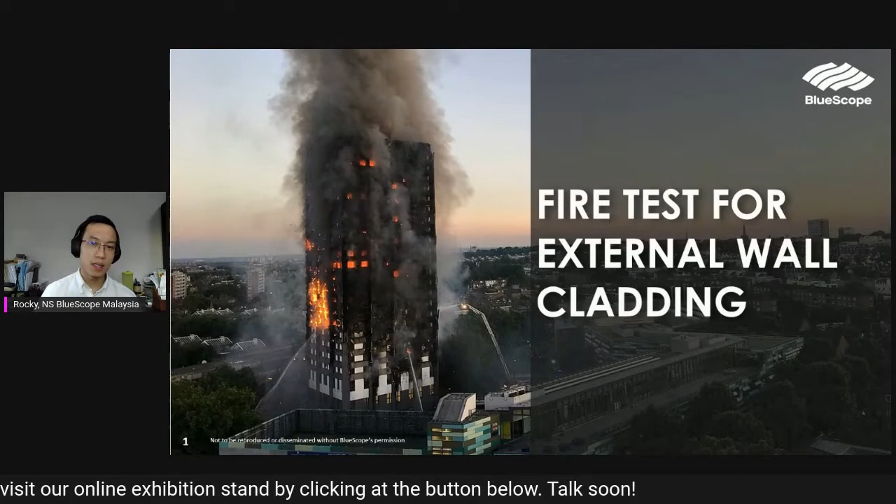So prior to introducing BS8414 and the requirements needed to pass the test, let me give you a bit of context on its importance, and also what measures were done in Malaysia prior to this test to curb cladding that could potentially catch fire.

So of course this is a hot topic, amid the incident that happened back in 2017 at Grenfell Tower. The picture you can see here is a really sad story where I think there were 72 fatalities after this incident, and it was actually caused by a simple fire.

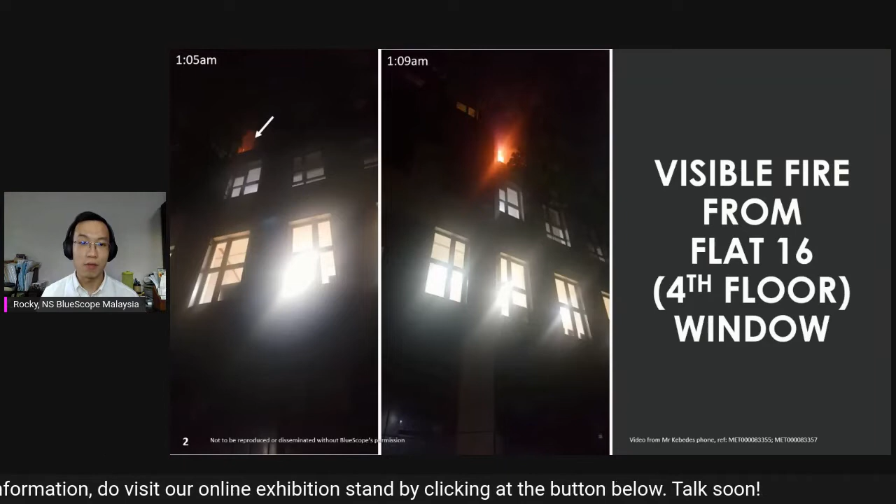So the context of this story is this: in the early morning, around 1 a.m., there was a fire that broke out from this building, in a unit on the fourth floor. The fire broke out of the window and started spreading outward, and it took only 20 minutes for the fire to spread from the fourth floor all the way up to the 24th floor.

And it didn't just spread upward, but it spread around the building. As you can see here, it actually completed one circle by the time it reached morning, and the fire was not extinguished by the time it reached early morning. You can also see that the fire broke into different units and caused fire spreading inward.

And of course, upon investigation, it was found that the cladding used to retrofit the building is conventionally called aluminum composite material, with an infill that is polymer, polyethylene. This infill itself is the major cause of the fire spreading.

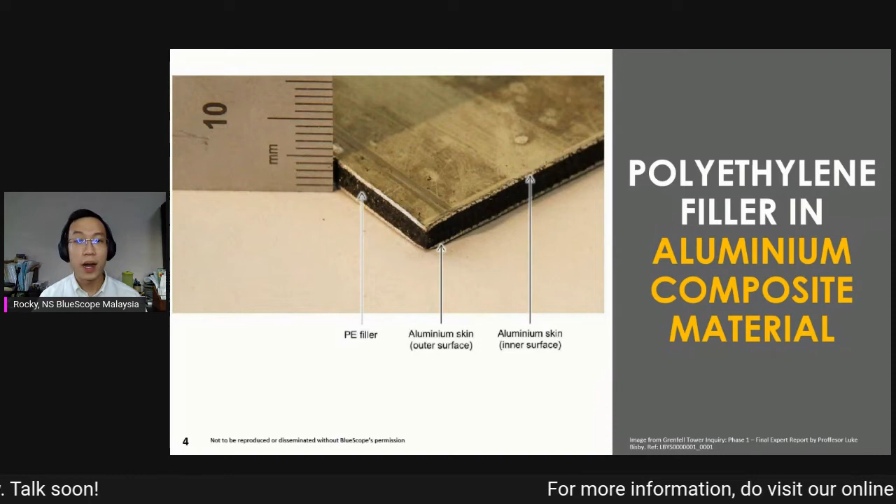So of course this is not unique to the Grenfell incident, it is also seen in various occasions throughout the world. In Malaysia, prior to the Grenfell Tower incident, I found one back in 2016 where the fire actually spread due to ongoing maintenance work that was done. The maintenance work involved some heat, some fire perhaps, and all of a sudden the cladding caught fire.

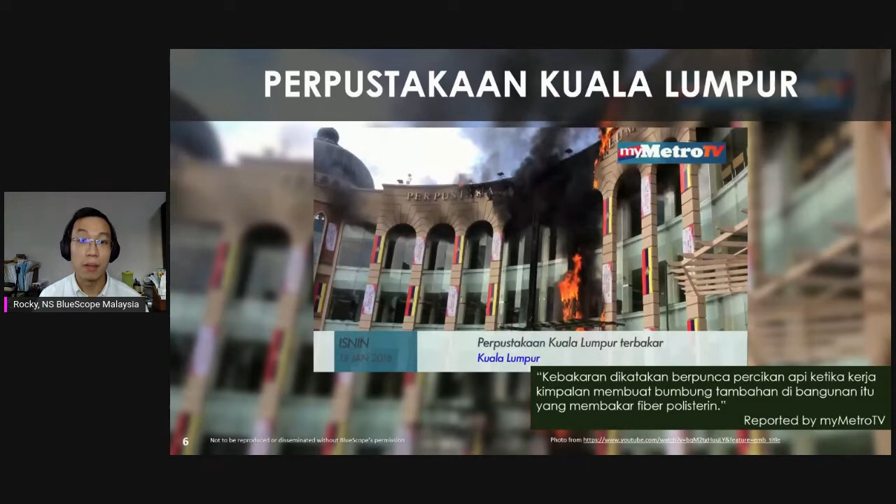What you can see here is that the fire quickly spread across as well. It's very similar to the Grenfell issue, and it was identified that there was a certain type of polystyrene used in the cladding, which created hazards. But luckily for this incident, there was no fatality.

And of course the more recent one was the KWSP PJ incident, where again there was maintenance work going on the external building, and the fire caught on and spread across very quickly. This is very similar to the example shown earlier. Upon investigation, it was found that the cladding itself did not meet certain safety requirements, and that particular reason seems to also be that there is a certain polymer, or what they call polyfoam, used in the cladding.

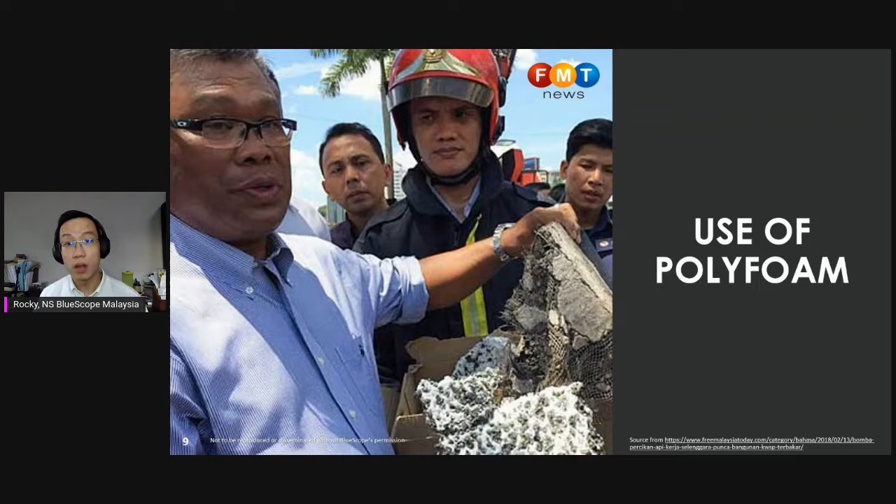So the question is, with the existing or previously existing system or regulation, why did this incident still happen, especially in Malaysia? Let me put you in context. Prior to this BS8414 test being introduced to test external cladding, to check whether it is suitable to be used and does not pose any fire incident or safety risk, they used this thing called Class O.

As you can see from this red box, Class O is less understood by a lot of people, and the requirement for a material to be considered Class O is that it needs to be tested under British standard BS 476 Part 6 and Part 7. I'll briefly run you through it later. One of the other misconceptions is that people will always perceive Class O as non-combustible material.

A material that is classified as Class O need not be non-combustible. I'll give you a brief rundown of what is non-combustible material. The new standard is actually BS 8414, which I'll explain briefly - how the setup works and the requirements needed to pass, especially in Malaysia, since that's the regulation enforced here.

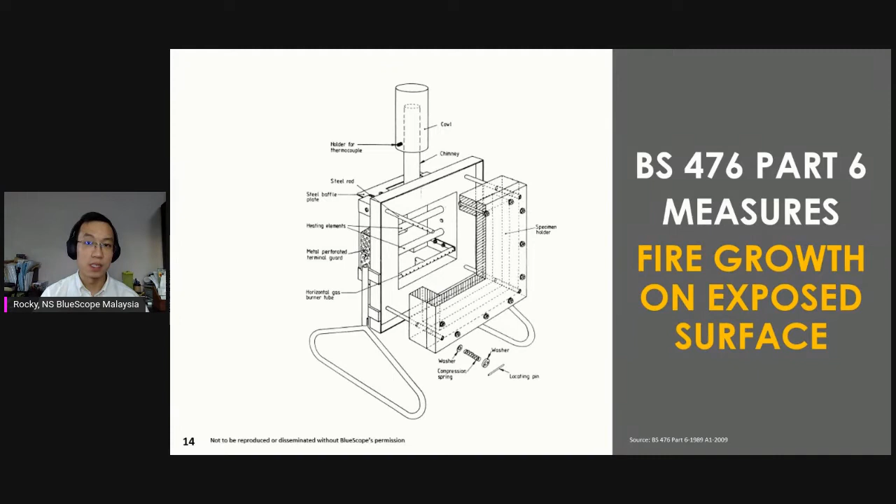So Part 6 goes like this - this is a diagram of the jig used to test the interaction of the building material with fire, testing whether fire would grow exponentially or upward from the surface. The specimen, also called the building material, is placed within this jig, and a fire source comes up front from the surface. Various abstract data is collected during this test.

Once collected, the data is calculated based on the standards. This test standard and calculation are quite abstract, so I won't go into details about how it's calculated or what it means. But essentially, you get two major results: one is the fire propagation index, or I, and another is indices I1, I2, and I3. These are used to check whether a material is classified as Class O or not.

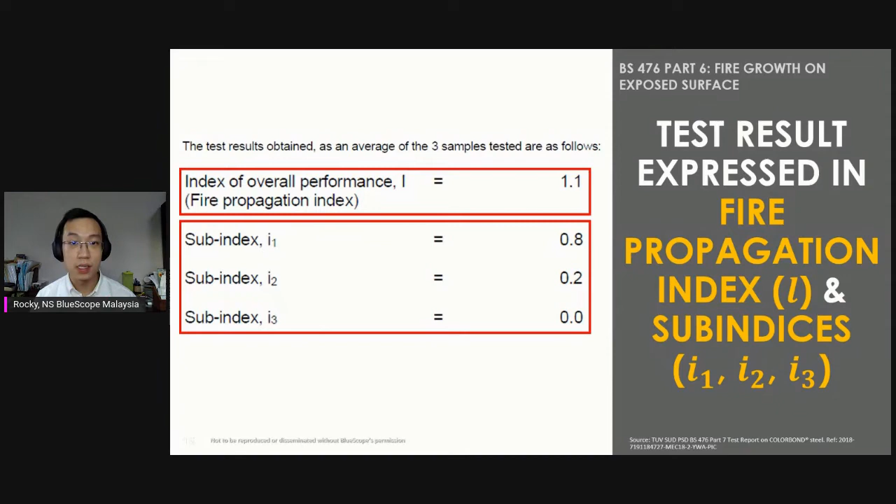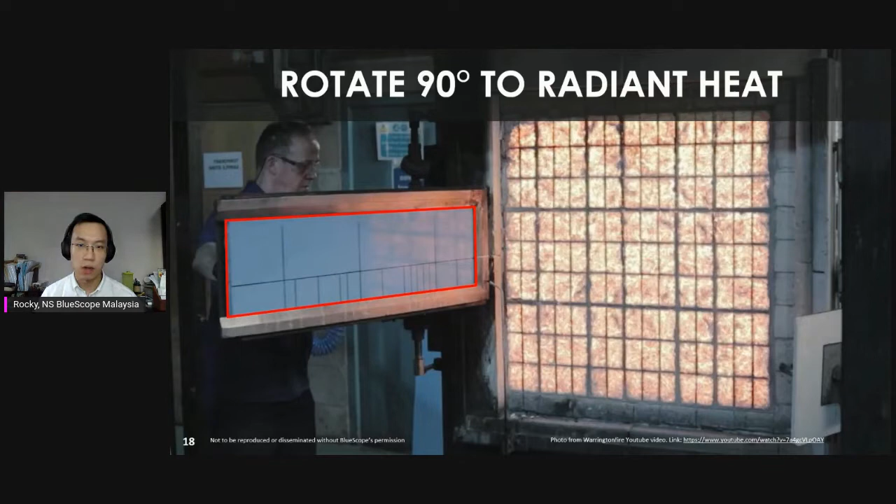The second test is BS 476 Part 7, which tests for spread of flame laterally on the surface. This is how the actual test setup works. I got an external source to demonstrate how it actually looks like during the tests - this is how it looks.

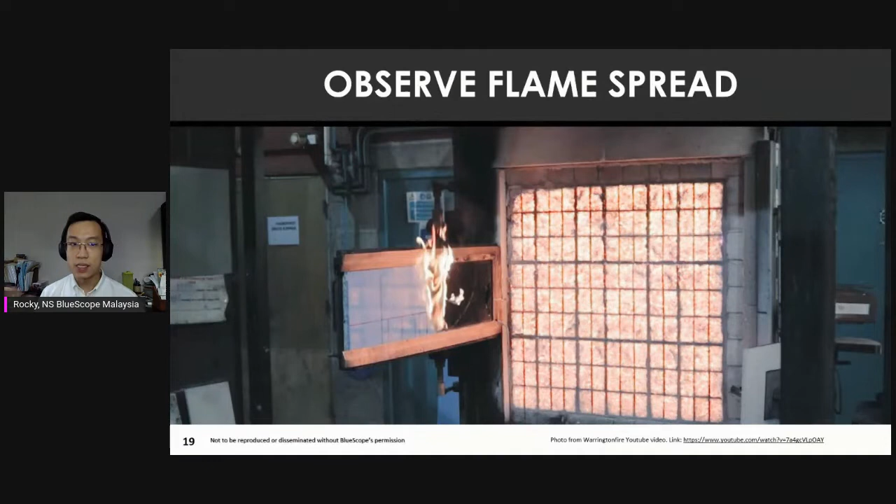The sample is installed perpendicular to the radiant heat, as you can see from the big surface, and there's an ignition point at the beginning. They test the whole thing until the fire subsides, or burns all the way to the end. As you can see from this video, the fire actually started spreading laterally.

In essence, this Part 7 test classifies the material as Class 1, Class 2, Class 3, or Class 4. If the fire ignited by the flame torch and radiant heat does not spread beyond the number 1 mark, then it's straightforward - it'll be classified as Class 1.

Similarly, if it does not spread beyond mark 2 but is within that range, it'll be classified as Class 2. Based on our observation - they actually test not just one sample but 6 sets of samples - if the result shows the fire does not spread beyond the number 1 circle box, then it will be classified as Class 1.

So the combination of Part 6, which is fire propagation index of less than 12 and sub-index I1 of less than 6, and Part 7, where the material is classified as Class 1, meaning it does not spread beyond box 1 - the combination of these two means the building material will be classified as Class O.

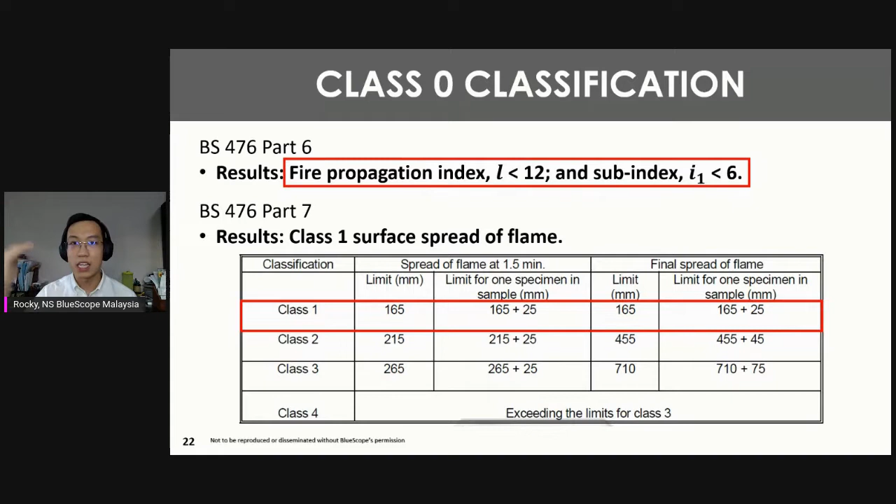In general, a pre-painted product with a very thin layer of paint would generally be classified as Class O. So we have done our test, and our product is considered Class O.

Having said that, Class O or these two tests have their own scope or limitation in terms of reaction towards a bigger fire. If you have a material where the infill itself is combustible, does not comply to these standards, or can catch fire, or even worse, like polyethylene that really adds fuel to the fire, these tests, part 6 and part 7, would not determine whether those will happen, because they only test the reaction of the building material surface. If you have a composite panel, they are only testing the surface, not the inside. This is where it differs from BS 8414, which I'll get into shortly.

Like I mentioned earlier, Class O does not represent non-combustible. Non-combustible goes through the BS 476 part 4 test. Non-combustible is actually a much more stringent requirement, because if it does not combust, it will not spread flame. But if it's classified as Class O, it might combust — the paint film might get burnt off very fast — but it might not spread flame, meaning it might not cause the fire to spread laterally or vertically. So that is what we mean by Class O and non-combustible.

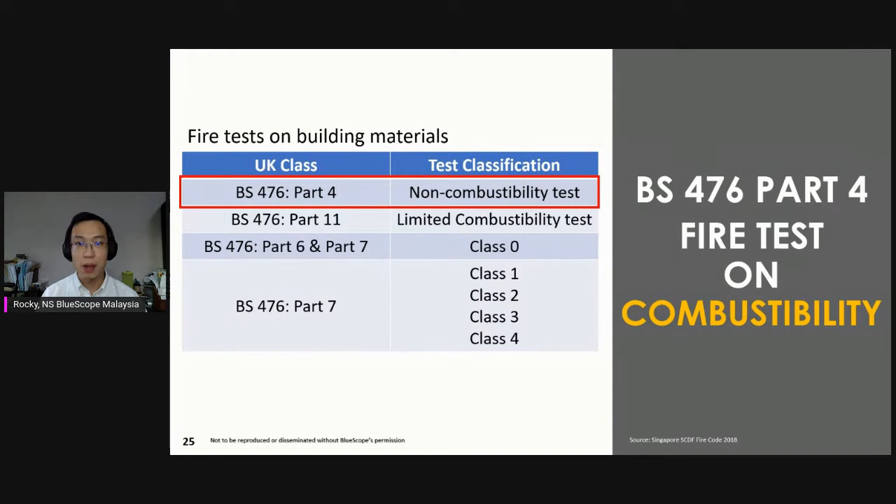So if you want to find out whether a homogeneous building material is considered non-combustible, you have to go through this test, BS 476 part 4. Here, they will actually test 3 specimens or samples of your building material, and come back with various requirements, which I will not drill down into. In the end, it will give you an answer on whether it's combustible or non-combustible.

We have done our test as well for those unpainted corrosion seal products, for example like Zincalume. Those will be classified as non-combustible material, without the paint film. And of course it's safer, because it does not catch on fire.

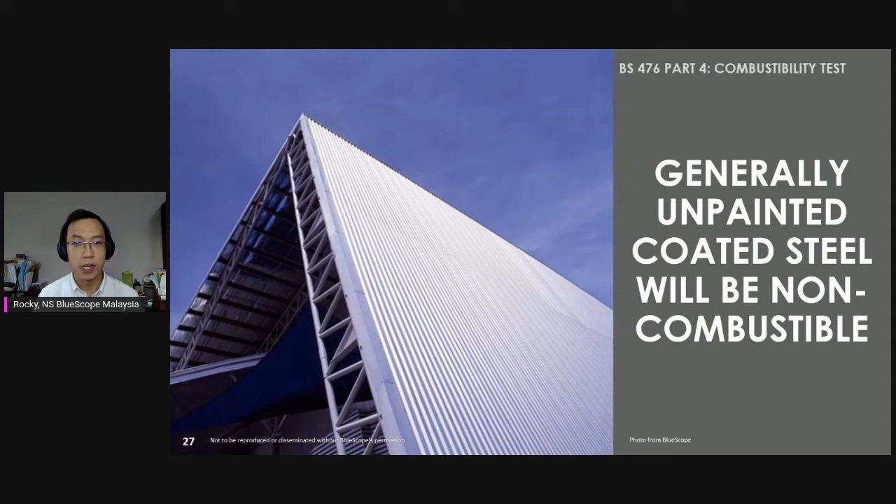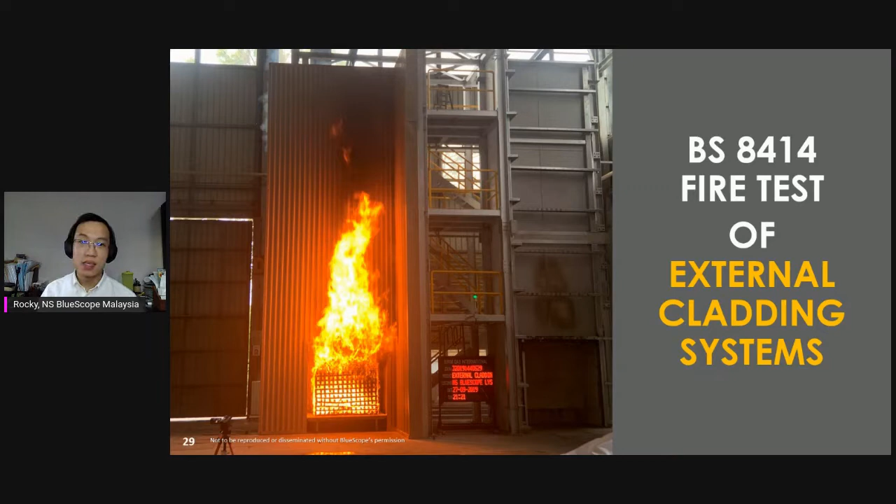Moving on to BS 8414 — what does it mean, and how does it differ from those tests I just mentioned? BS 8414 is actually a test for a complete external cladding system. This is how it looks like during the test. As you can see, there are actually 3 floors — the scale is much, much bigger, and the fire is much more severe than the earlier tests.

This test itself tests for a complete build-up. For example, there'll be a testing of the fire breaking out from this chamber, and then seeing how the cladding interacts with the fire. A lot of factors are taken into account, such as the cavity space between, say, a masonry wall and the external facade or cladding. The whole thing is to simulate how the cladding reacts to the fire, in plain and simple description.

So the intention is that if the whole cladding system is installed, they want to see whether a fire that started from inside the building — for example, like the Grenfell Tower, where fire started from the kitchen — as well as fire from an external source, for example the KWSP or the Perpustakaan KL case, would cause the external cladding to spread fire upward and around. Ideally you do not want that to happen, otherwise it will cause harm not just to that one localized place, but spread all over the building.

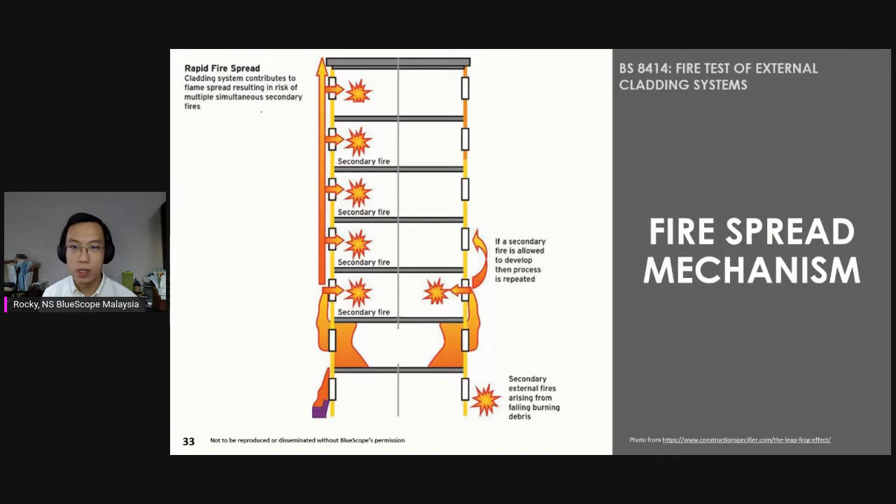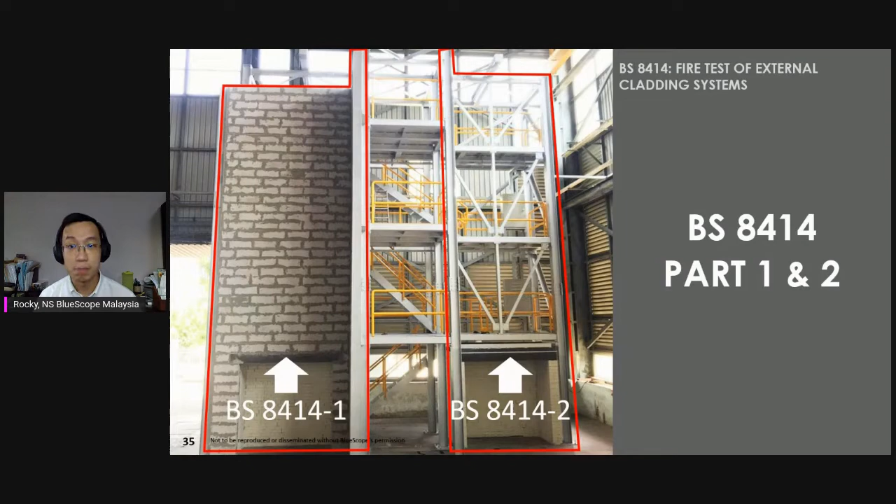Prior to installation, this is how the cladding looks like, and these are the test rigs. For BS 8414, there are actually two parts — part 1 and part 2. Part 1 is external cladding locking onto a masonry wall; if you have a plaster wall and want to beautify it by adding a facade or external cladding, you go for the part 1 test. If it's actually a steel structure wall, where the cladding locks onto this structural wall, then you go for part 2 test. In essence there's only one difference, which I'll go into later on, but the setup is more or less very similar. This is the diagram of how each looks like in terms of setup.

So there will be a main face and a wing face, where at the bottom you can see the combustion chamber where the fires will be started, and then there will be a fire source, a specific type of wood that gives an approximate amount of heat. The cladding itself needs to be at least 6 meters high above the chamber, and there are various other dimensions like the width and the wing face width.

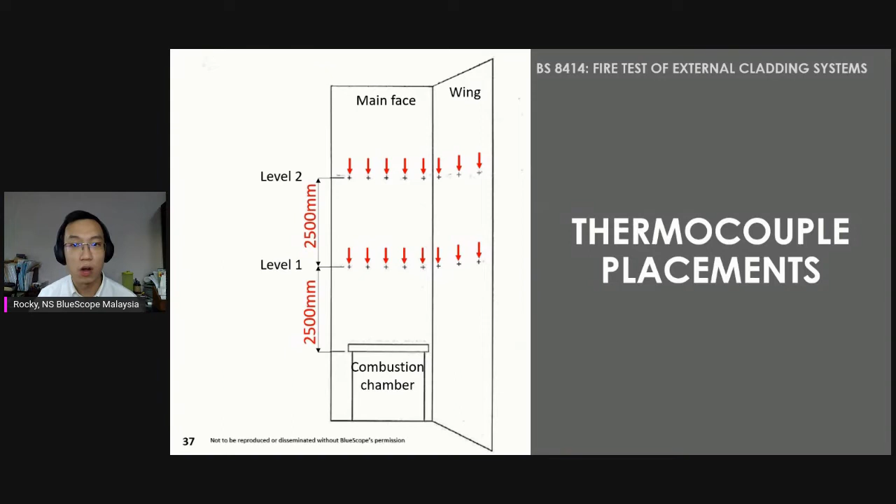There are actually quite a lot of sensors to be installed. So there are 8 thermocouples, actually more than that because there are external and internal ones. For level 1, which is 2.5 meters above the combustion chamber, there will be thermocouples, meaning temperature reading sensors. Then there is a more crucial one at level 2, which is 5 meters above the combustion chamber. So these two will be taken into consideration and evaluation for whether it passes or fails.

For the setup, for example, if it is locked onto a masonry wall, they will classify the outer surface behind it, in between the masonry wall and the most outer surface cladding, as internal area, and the outer surface will be classified as external. This is important because they will place thermocouples at those places, and within the internal area, if there are insulations thicker than a certain dimension, they will insert a thermocouple at the middle of that thickness. So there are a lot of sensors needed to take readings of how this cladding interacts with such severe fire breakout from the window.

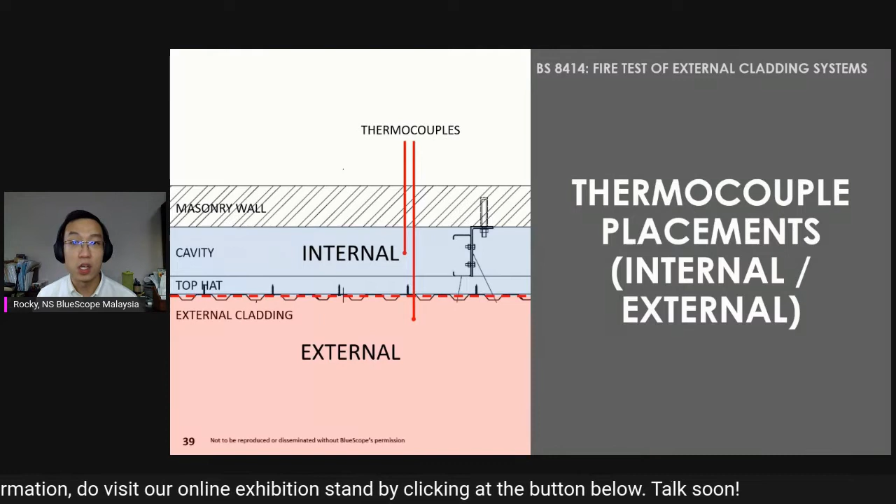So this is how the sensors look, the external thermocouple. It looks very simple, just a wire, but of course there are actually a lot of things connected to it to capture the reading.

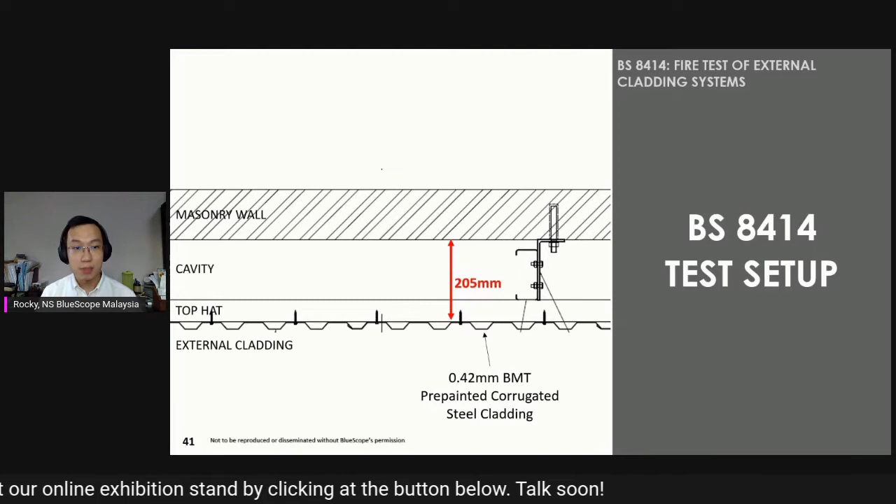There are a lot of factors that need to be taken into account. These are some examples, which Mr. Lau will elaborate on in more detail in the complete report. Things like the cavity space, or the so-called gap in between the masonry wall and the cladding, will be taken into account. These are some examples, or maybe the thickness of the cladding - those are also part of the consideration when they capture it in the report.

The amount of screws, the type of screws, the C channels, the thickness of all of that needs to be taken into account, because the requirements, also called the regulations, require that the specific type of setup, with a specific type of cavity space, needs to be tested to BS 8414 and acknowledged by BOMBA, who will give you an approval for that specific spec. After that, you can use the same setup for different kinds of locations or projects that require this test.

When it comes to requirements, it is similar to BS 476 class 0 - it will not be stated in BS 8414. If you read through the whole document, you will not find one section that tells you how to pass this test. That's because each country sets its own criteria, and since Malaysia adopted this testing standard from the UK, British standard, we also adopt the requirements from their regulators - building regulators or fire safety regulators.

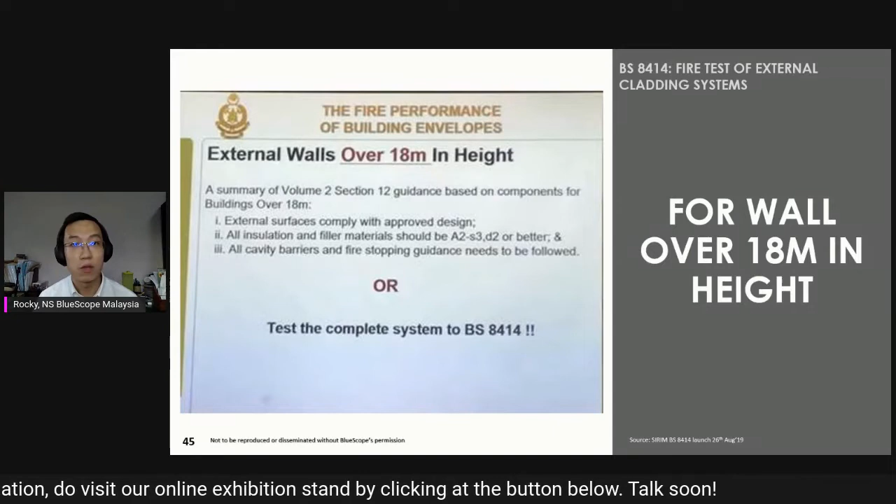Okay, so anything beyond 18 meters, then you can go for this BS 8414 test. Those are the exceptions. Right, so let's get into the requirements.

The first one is, remember the external thermocouple. Those external thermocouples will get readings from the fire source down there. If there's fire spreading on the external surface, then the temperature reading of this thermocouple will be high, right? So the requirement is this.

The external temperature should not exceed 600 degrees Celsius for 30 seconds continuously within the 15 minutes from start time. And I emphasize on start time because that is a very specific term referred to in BS 8414, the testing setup and terminology that they use. Start time refers to a specific time during the test, which Mr. Lau will elaborate further during his part of the presentation. So this is the first criteria.

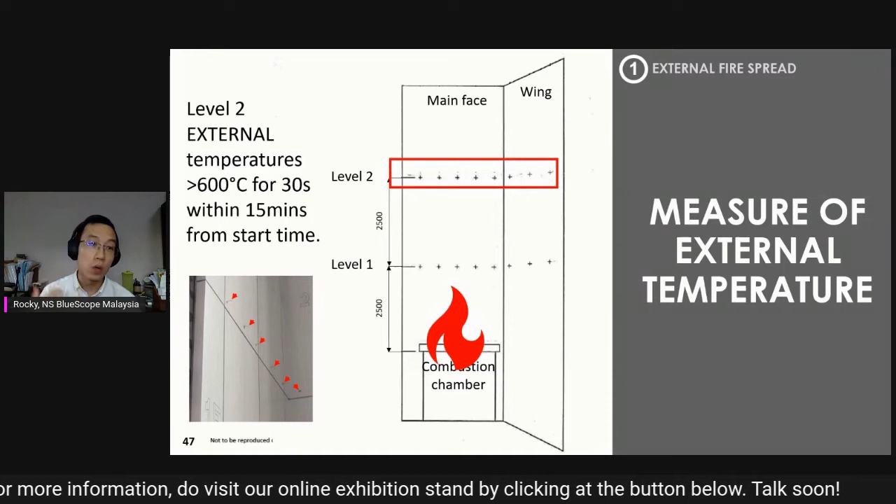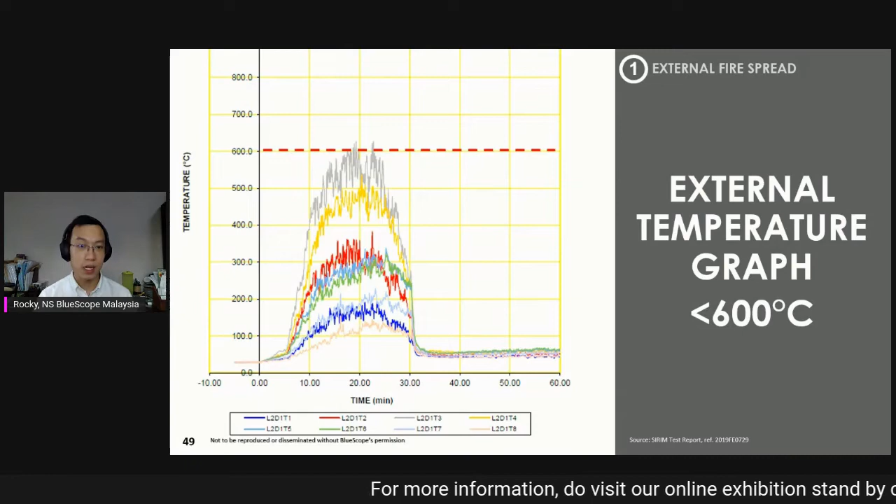Let me just extract, so this is how it looks like. If let's say this one, the fire actually briefly touched 600 degrees Celsius but briefly did not exceed 30 seconds, so this is considered borderline pass.

So another one, the second criteria, is internal fire spread. Same like external, the internal thermocouple also should not capture readings that exceed 600 degrees Celsius for 30 seconds continuously within that 15 minutes from start time.

Okay, and it is all measured, I mean the external and internal are all measured at the level 2 area. Level 1 is only used to determine start time. Level 2 is used to capture all this reading.

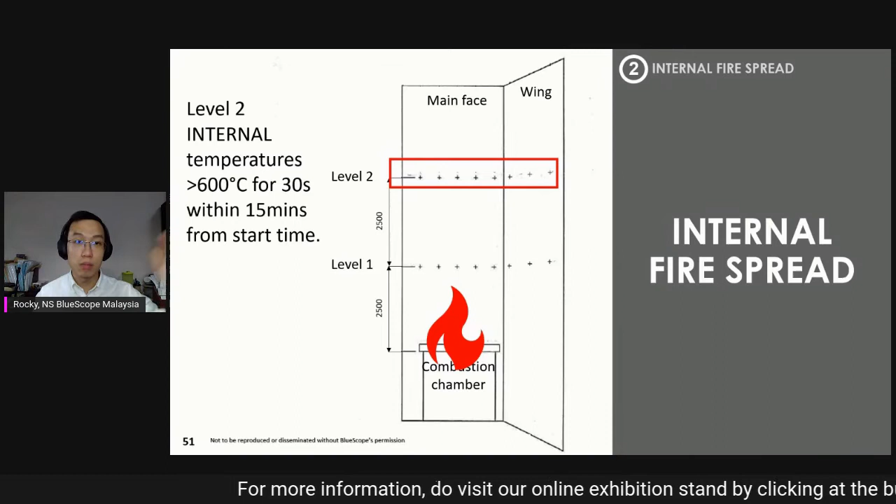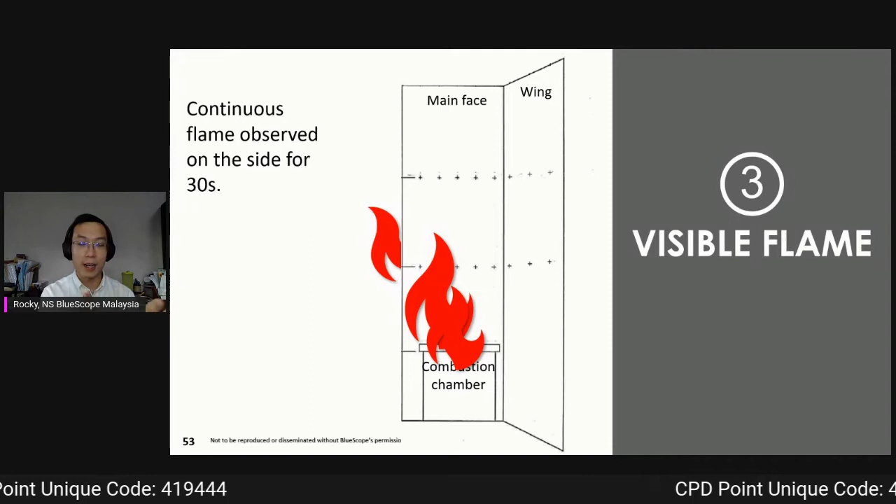So moving on to the third one, which is very qualitative, meaning based on observation. There should not be visible flame outside of this perimeter. Meaning, if the tester saw fire spreading outside of this main face from the back, or beyond the main face, top of the main face, for 30 seconds continuously, then you fail this third criteria.

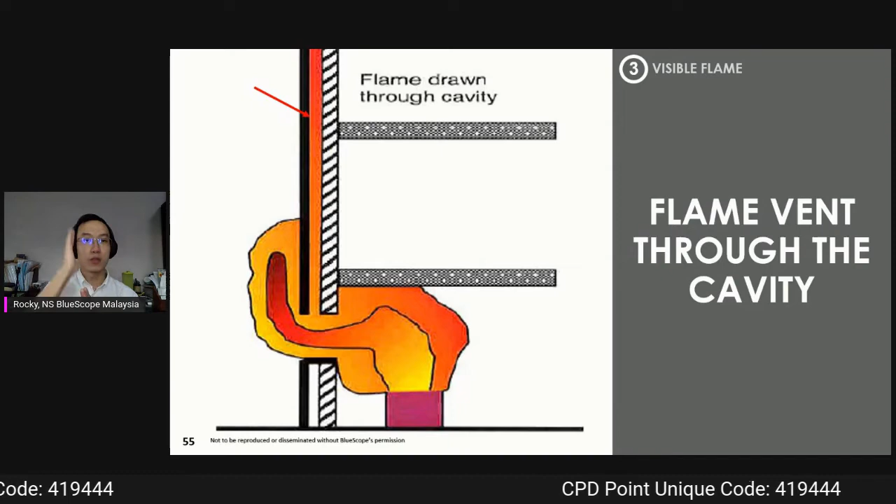So this is also part of the consideration why they need to determine the cavity distance, because if fire is allowed to vent through this place, then you will see visible fire. Of course, based on the test setup we saw and the testing done, there was no visible flame observed, be it on the side or beyond the perimeter.

Okay, so those are the first three. Of course, before I move into the fourth and fifth, we need to determine what we call the collapse zone, which are areas that are 2.4 meters in width and 1.2 meters in depth away from the window. So this is what we call collapse zone. Anything that falls beyond this collapse zone is considered fail.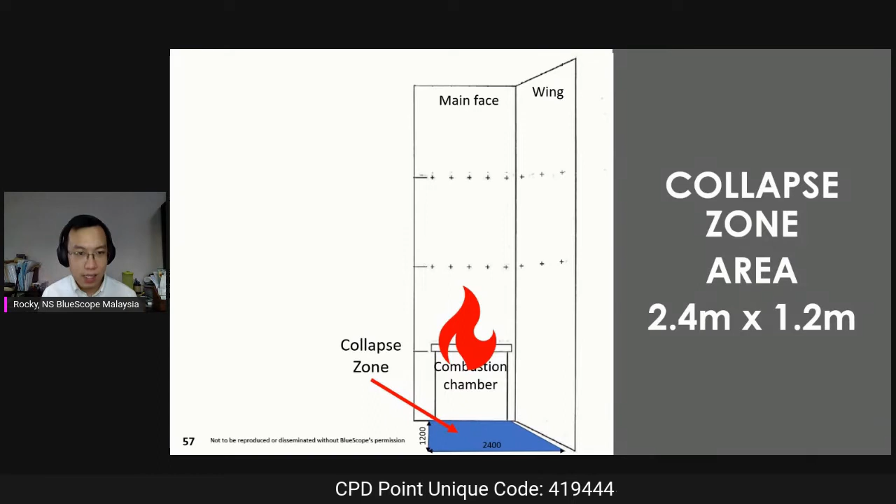So the first one is mechanical performance. After the fire has started, they set a time of 30 minutes. After 30 minutes, they will put out the fire, and then the next 30 minutes they'll observe whether there's any mechanical failure. Any parts that fall outside of this collapse zone will be considered fail. As straightforward as that.

The reason is because they don't want any further danger posed to the pedestrian area, because you don't want the cladding to fall and cause harm, especially to those fire brigades. So that is one of the considerations. If it does not fall outside of this zone, then it will be considered pass.

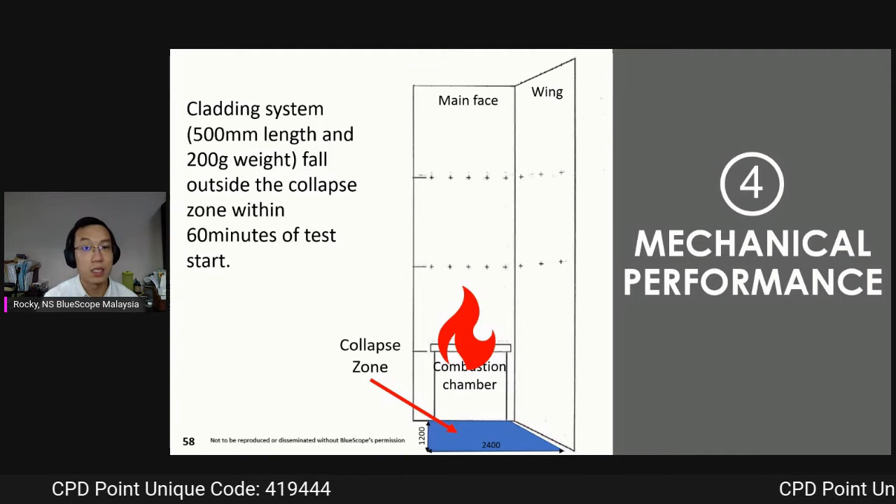Right, so this is the fifth criteria, and they do not want that to happen. Last but not least, it will be tested if the cladding is installed onto the steel structure, that there should not be fire observed at the back of the cladding if it's locked onto a steel structure, for 60 seconds continuously.

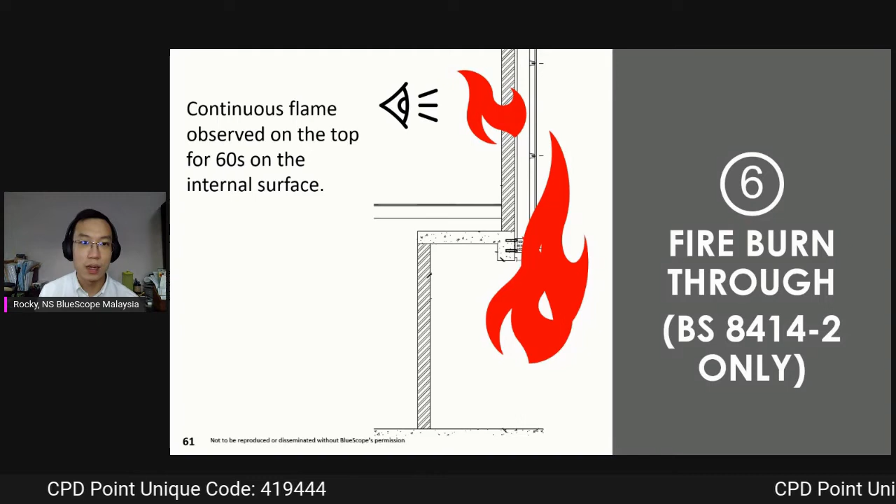And this is only tested on BS 8414 Part 2, simply because masonry walls tend to be quite solid and withstand quite a lot of heat in that case.

So in summary, those are the 6 requirements that you can again find on our website. This is a matter of public interest, so do take your time to actually study it.

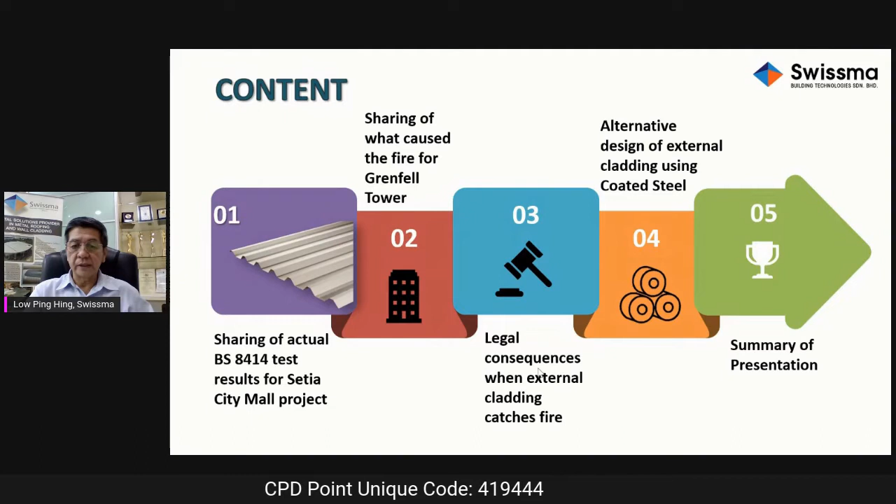So let me start with the sharing of the Setia City Mall BS8414 test. This is Setia City Mall located at Setia Alam. This mall underwent extensive extension work and also a huge facelift to the existing mall facade using Swissma SANKO speed deck in Colorbond steel.

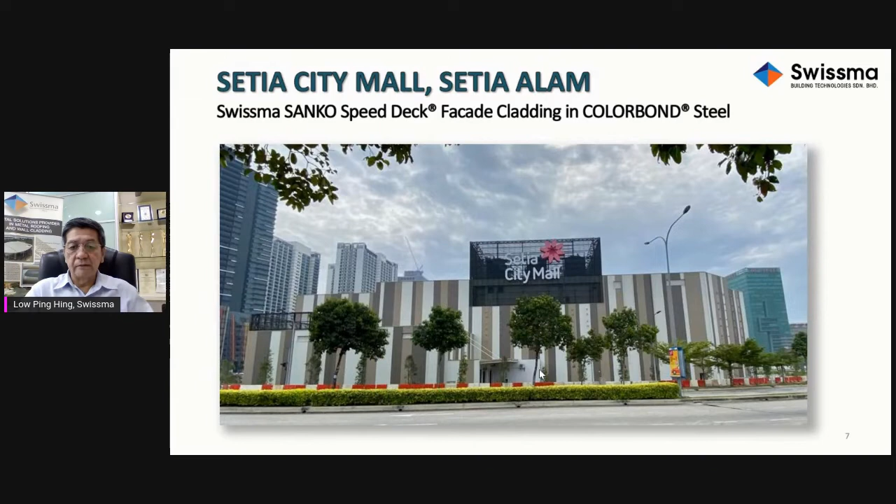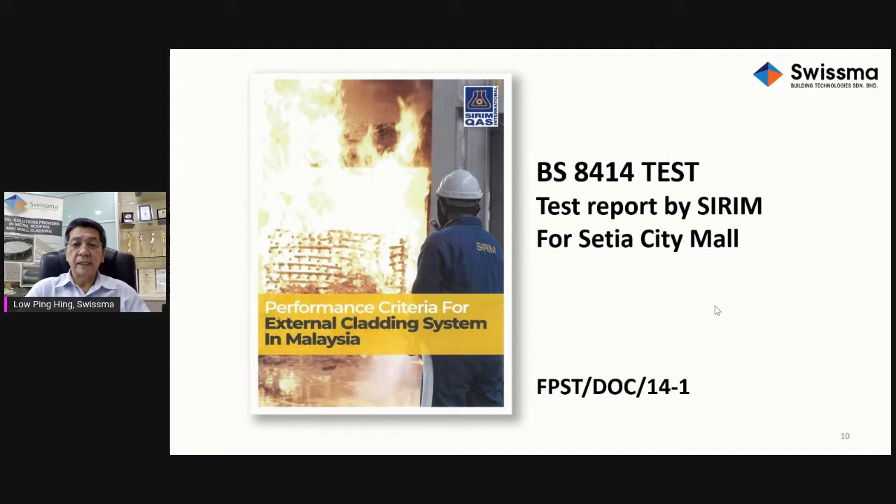So for this project, Bomba required that there be 3 tests conducted because of the facade mounting to different aspects of the wall. Test number 1 is a Part 2 test, meaning over a drywall system and not a masonry wall. Test number 2 is Part 1, over the existing mall, which is on the masonry wall. The test number 1 is actually a drywall done for the extension work.

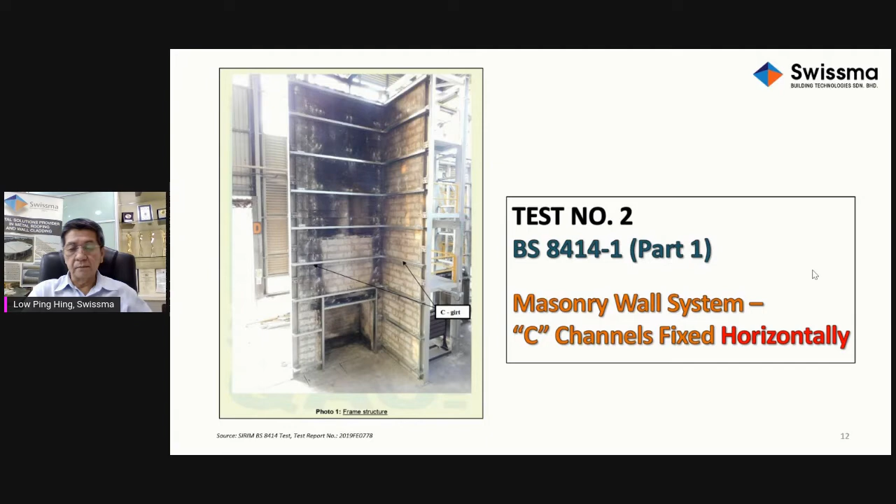For test number 2, you can see that the main structure frame is installed horizontally like a mullion, whereas test number 3 is again the Part 1 over masonry wall, but in this case the main structure is installed vertically.

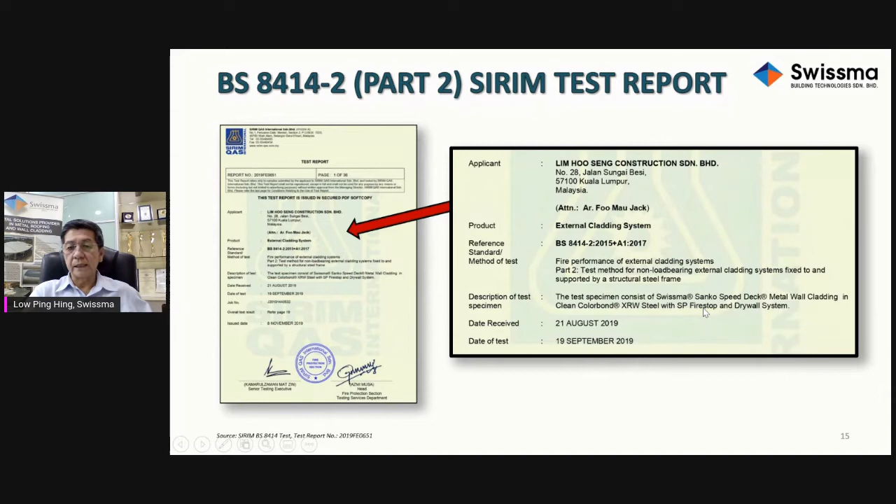When you do a BS8414 test, you have to first submit documentation to SIRIM. Among the documents, one of the most important is your construction method for the cladding system. You have to have very detailed drawings about how you're going to construct this external wall cladding.

In this case, for this test, that's a combustion chamber. You can see there's a fire stop installed immediately on top of the combustion chamber. There's a flashing below, then a drywall, the structure, and then the external facade cladding.

This is another description in the test report. They measure the thickness of the drywall, which in this case is 89 millimeters. The cavity depth is also measured. This is a very important measurement because the cavity can act as a chimney and propagate fires internally. The measurement is taken from the back face of the corrugated metal cladding to the front face of the drywall system. For the horizontal fire stop incorporated, they also capture the width and thickness of the fire stop, and mention where it is located.

So when you want to do a BS8414 test, you are at liberty to incorporate as many fire stops as you like, placed horizontally or vertically to compartmentalize the cavity as you deem necessary. But bear in mind, whatever you incorporate in the test, you've got to implement it at the actual job site. So the more fire stops you need to pass the test, the more costly your cladding system becomes.

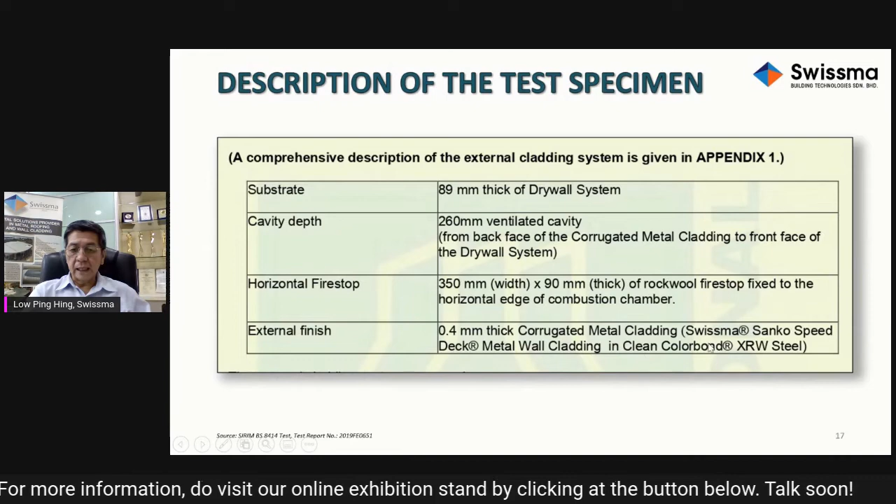The external finish is also documented: corrugated metal cladding, brand Swissma Sanko Speed Deck, metal wall cladding in Clean Colorbond XRW steel. So the material is also stated.

Description of the test specimen: the standard also calls for certain dimensions that you need to meet. For example, the assembly of the test specimen in this case is 6 meters above the top of the combustion chamber, so it's minimally 6 or more. The actual measurement is 7645 millimeters, so it meets the requirement.

The next requirement is minimally 2.4 or more, and it's 2.6, so it passed. Then 1.2 or more, so it's 1.33, which meets the requirement again.

Here they also specify the exact measurement from the finished specimen at the wing wall face to the side of the combustion chamber opening, which should be 260 millimeters plus or minus 100 millimeters, and ours was 340. The next is the width and height of the combustion chamber opening. They stipulate a minimum combustion chamber opening that is not blocked, and we meet those requirements.

Here is a horizontal joint, if present, placed 2.4 meters plus or minus 0.1 meter above the combustion chamber opening. They are very specific: if you have a horizontal joint, it shall be located at this position. Ours has a joint, or lapping, located at this 2.4 meter height.

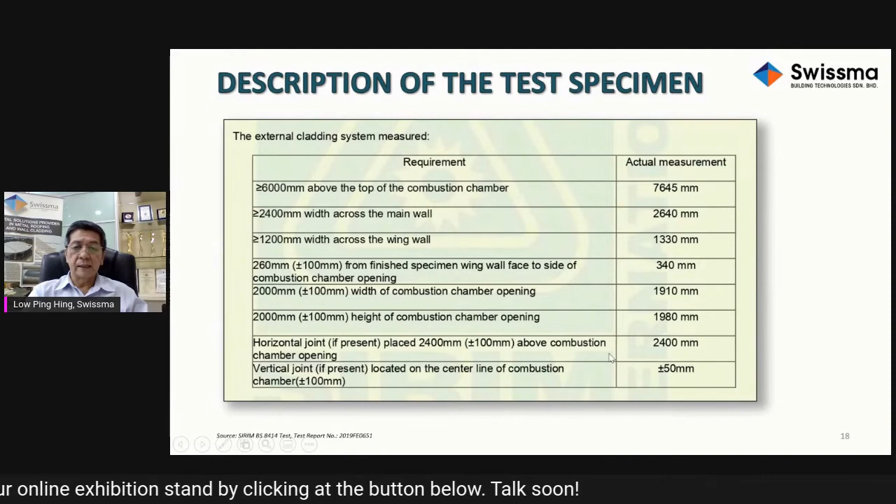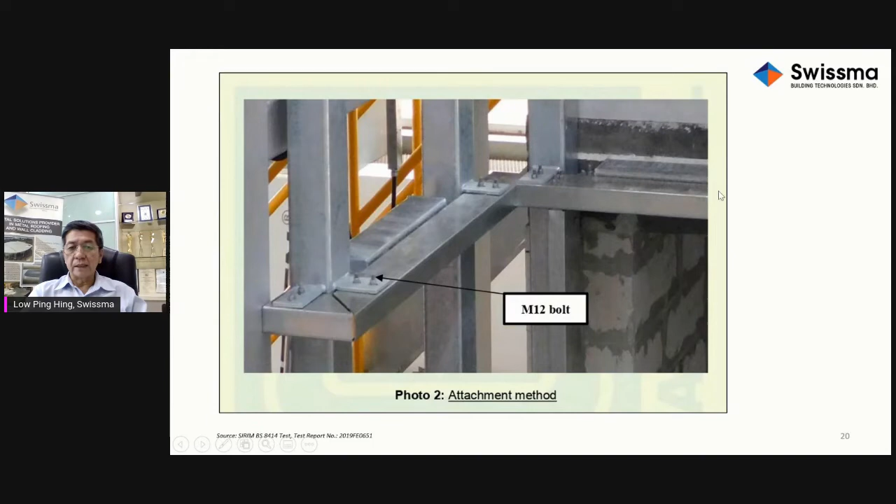This is a close-up photo of the steel structure, just to show that this is constructed exactly based on what you would do on the construction site. So it's not a makeshift structure.

But personally, from those incidents like Grenfell Tower, you should avoid combustible insulation material or insulation with a low melting point, because all these will be detrimental or create problems in your test.

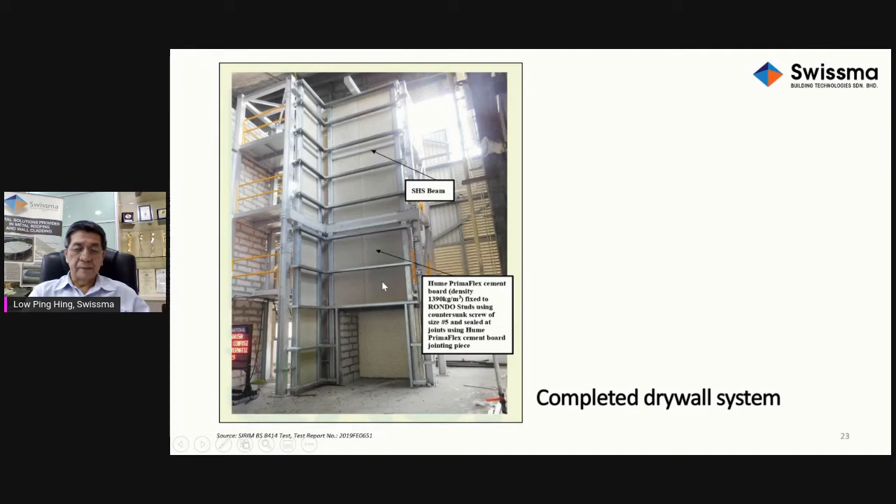This is the external wall. The external drywall is a cement board, a Hume cement board. This is a close-up look — you can see they have this element to close the joint, and when you construct, you also have to do the same.

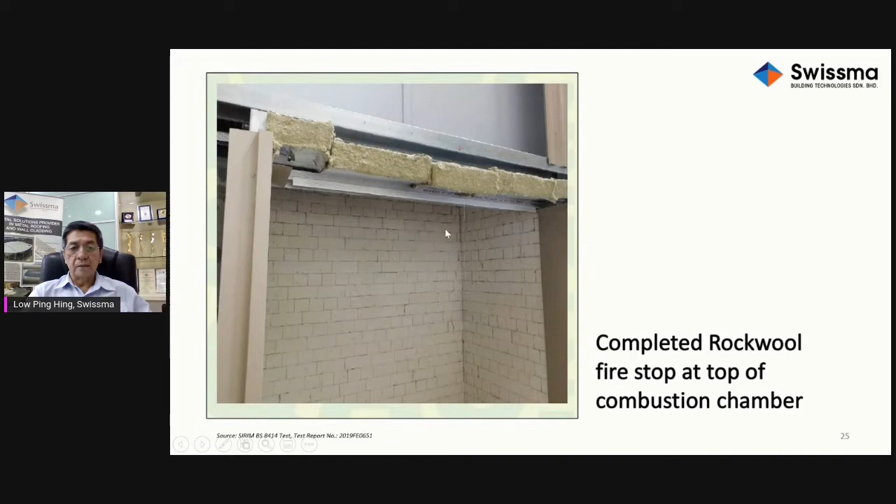That is the fire stop, the rock wool fire stop, placed directly above the combustion chamber, and there's a flashing below as well.

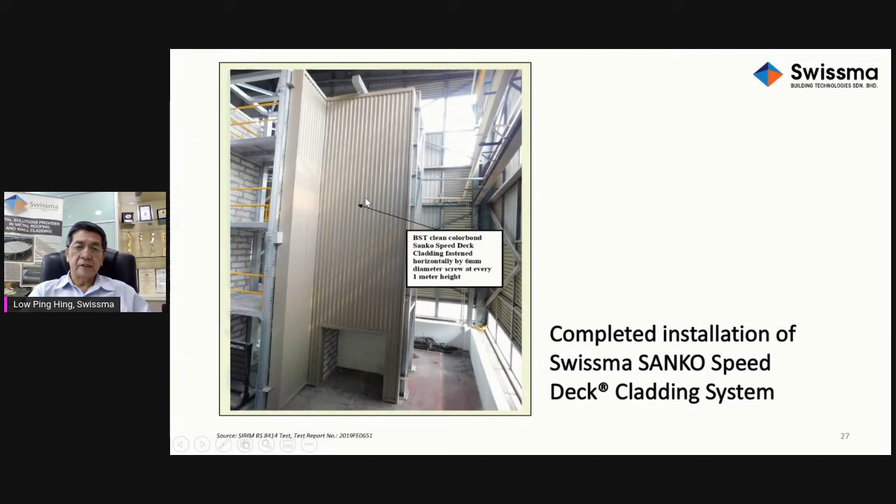So the next assembly is the flashing or the perimeter flashing around this test rig. This is a completed version of the specimen that's to be tested, ready to go for the test.

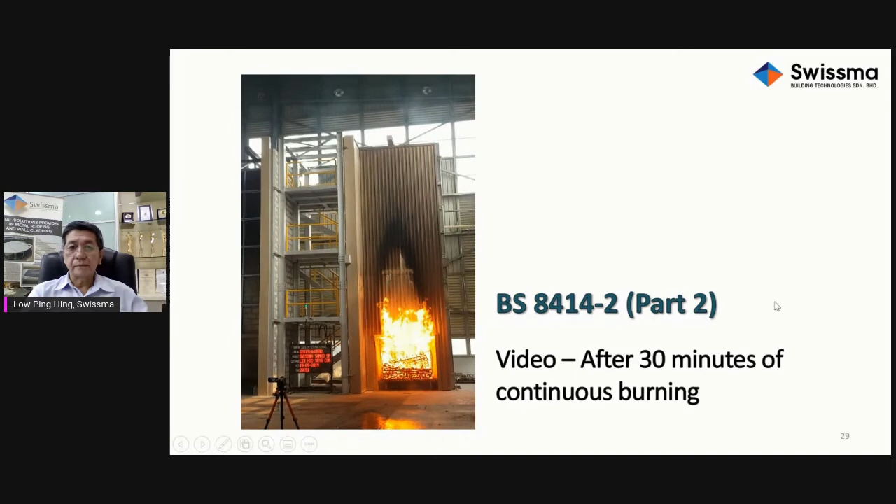So this recording shows the test conditions. The ambient temperature is recorded. At the start time, temperature was recorded at 27.8 degrees Celsius. The wind speed is also recorded, because you cannot have wind inside this test rig, because the wind will fan the fire and it will not be accurate.

Then the start time, Rocky mentioned the start time. The test actually starts when the thermocouple at level 1 registers a temperature of 200 degrees Celsius. So when this hits 200 degrees Celsius, the test time will start. In this test, the temperature of 200 degrees Celsius was achieved after 8 minutes and 12 seconds after ignition.

Of the creep, the peak temperature measured at level 2, which is here, was 532.6 degrees Celsius, and it reached that temperature after 10 minutes and 33 seconds. That means if you add these two together, from when you start the fire, it's like 18 minutes 45 seconds that this temperature is reached. But when you start your timing from start time, it's 10 minutes 33 seconds.

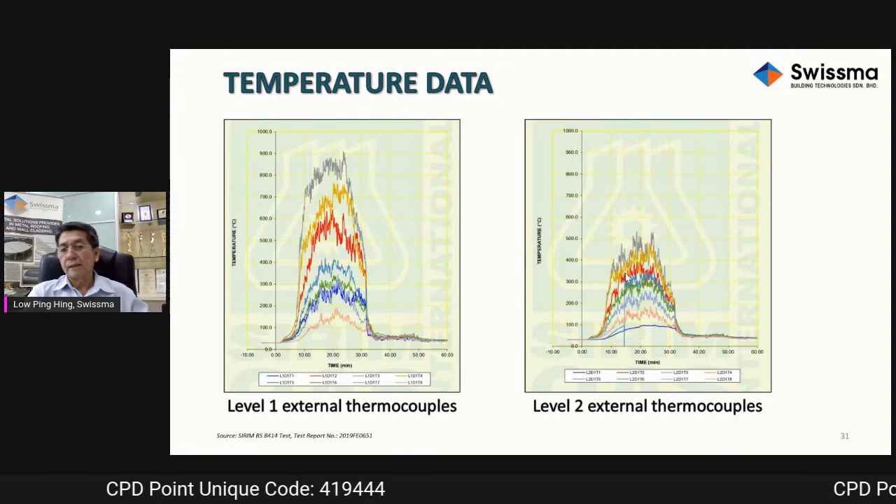So level 2 is the criteria for passing, which says that the external cladding cannot achieve a temperature of 600 degrees Celsius. In our case, it's only 532 as recorded, so that external cladding fire temperature passed.

This is level 2 at the cavity. This just shows how the temperature rises and then drops back over time. And this is inside the drywall, which is actually much, much lower.

So test results, this is the summary of the test. External fire spread within the 15 minutes or so, pass. Internal fire spread, the cavity area, also pass. All these pass means is less than 600 degrees Celsius. Internal fire spread at mid depth of the partition, this is additional measurement for part 2, also pass. Next criteria, the visible flaming.

As explained by Rocky, the flame cannot exceed the confines of the test rig vertically or laterally, and in our test it was well within the confines. Mechanical performance again measures whether any objects fall outside the collapse crib zone, or crib collapse zone rather, so they are very specific. Any object that falls out of this collapse zone with a certain length and weight is deemed a fail. In our test, we passed.

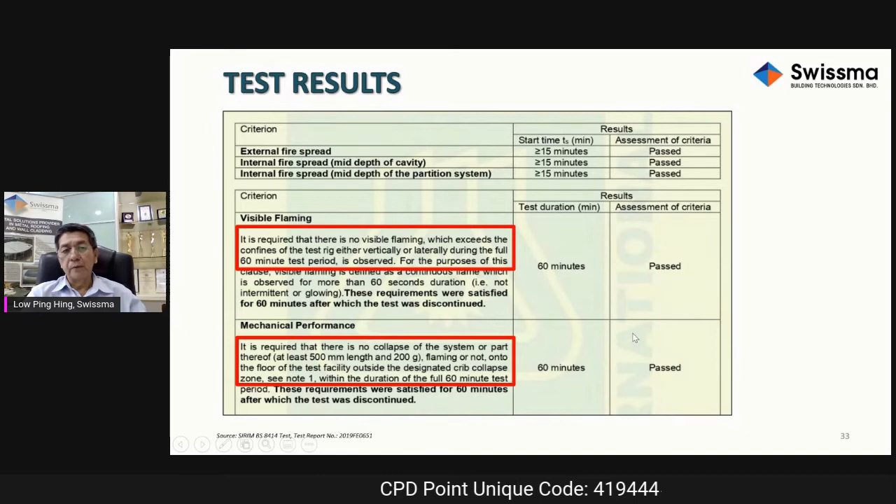Burning debris and pool fires, again this has to be falling outside the designated crib collapse zone, and in our case none of these fall out of the zone. So we pass, with also very minimal debris falling onto the zone.

This is the burn through. This additional requirement is for part 2 test only, because the requirement on part 2 is to assess whether there's any burn through, in this case the drywall system, and there was no burning through, so it passed.

Overall, this test passed all 6 criteria, and this is the condition of the test specimen after the test.

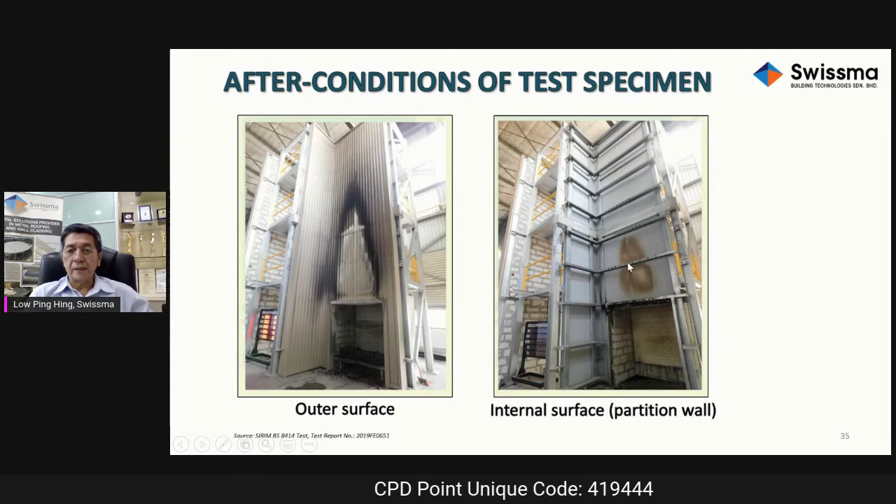So the outer surface shows the flame rises and tapers off in this triangular shape. This is about the distance of level 1, and that's level 2, approximately. When we remove this external cladding, you can see that the cement board drywall system is scorched and cracked. It cracks, but didn't allow the fire to propagate through, so it's safe, and the rock wool is still very much intact.

So this is before the test and after the test. I'll zoom in on this photo here.

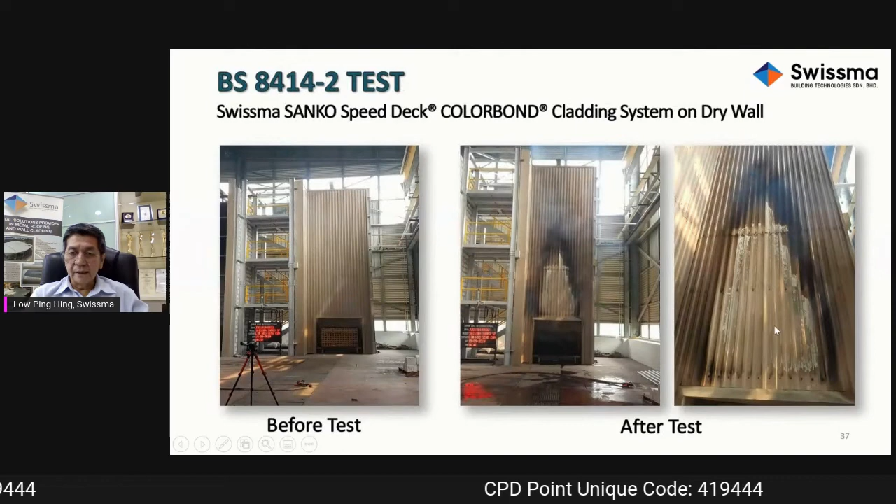I just want to highlight this joint. This is a lapping joint. As one of the criteria, if you have a lap, it has to be located at this point, which is 2.5 meters above the combustion chamber. That's the reason why there was this lap at that particular location. There is also a vertical joint at the center line of the combustion chamber.

Next, I would like to share what caused the fire at Grenfell Tower. Grenfell Tower fire took place on June 14, 2017.

Very good job done by the fire brigade, considering that the fire was encapsulating the whole building, and they managed to bring it down 4 hours after the fire started.

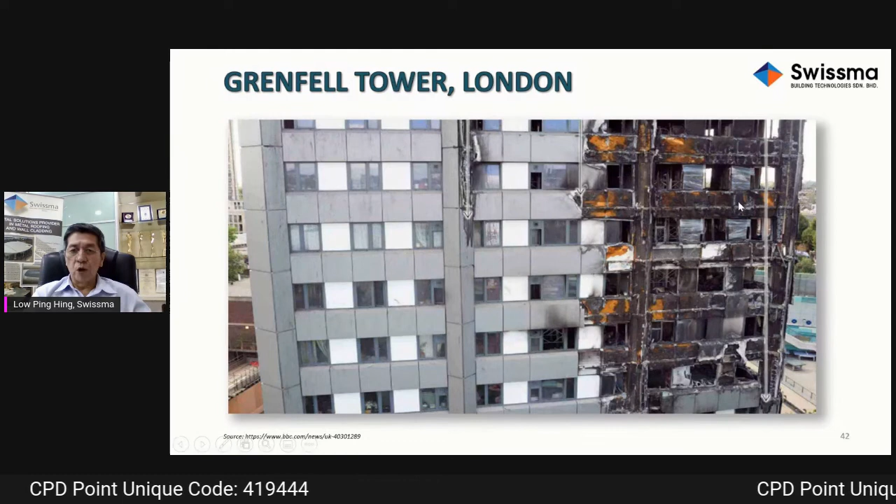So this is how it looks on close-up. The cladding is completely burned up, and possibly if it's a low melting point material like aluminium - aluminium has a melting point about 660 degrees Celsius - it could have gone beyond that temperature and melted the aluminum away.

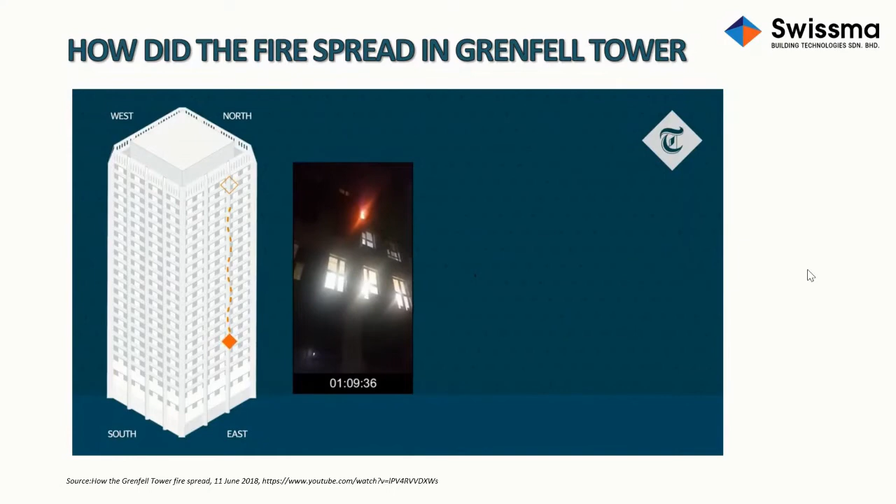The blaze started in flat 16 on the 4th floor of the east elevation. It rapidly spread through the window. The first image of the flames taking hold outside flat 16 was taken at 1:09 a.m. It took just a few minutes for the fire to spread up 19 stories to the top of the building. While the fire was spreading upwards, it was also spreading horizontally at a tremendous rate, in opposite directions, until all 4 elevations of the building were engulfed in flames. The flames met at levels 22 and 23, near the southeast corner of the building. In total, 98 flats were exposed to the flames. 72 people lost their lives in the tragedy.

So that gives you a snapshot of how the fire started and how quickly it spread vertically and laterally. It was quite scary how fast and how rapidly the fire could spread.

There is a public inquiry being conducted and still ongoing to investigate this fire incident. Sir Martin Moore-Bick is the chairman of this public inquiry, and I'd like to share what he has to say. I've just extracted the essential part of his speech.

I find that the principal reason why the fire developed so fiercely was the presence of aluminium composite rain screen panels containing a polyethylene core, which is highly combustible. But the insulation boards and other combustible materials also made a contribution. The architectural crown, a decorative feature introduced as part of the refurbishment, played a significant role in enabling the fire to spread around the building. The heat of the fire on the outside of the building was sufficient to break the glazing and allow the fire to enter individual flats.

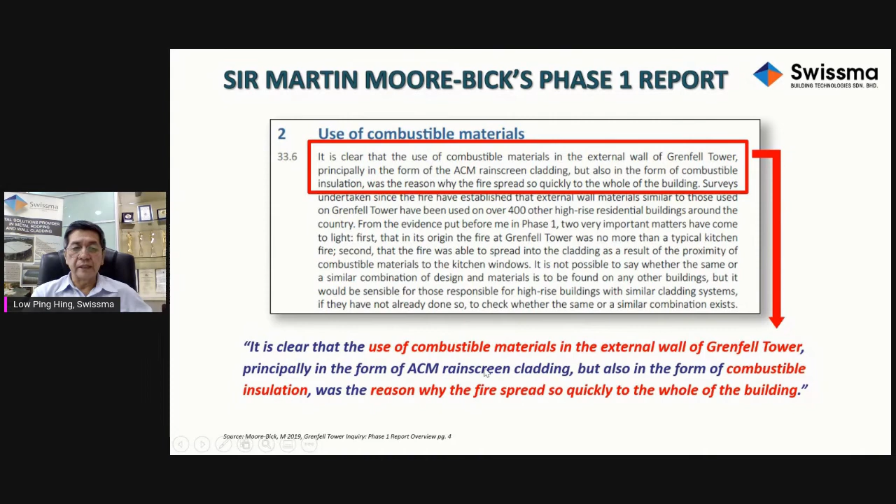So in Grenfell, they not only had combustible ACM rain screen, they also had combustible insulation.

Professor Luke Bisby conducted his own tests based on 8414 for the ACP, and this is the test I'd like to share, starting from 5 minutes 58 seconds.

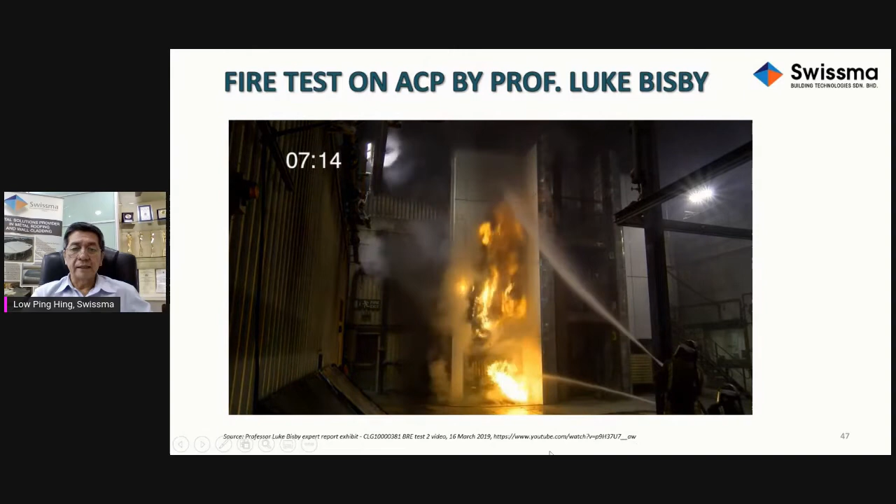This is coming close to 50 seconds only. You can see how intense the fire is, and you can see that there is facade cladding that has been burned through or melted away. This is just over a minute, and that's it, right? You can see the pool of fires. I'm not sure whether there is any material of significant size and weight that fell out of the collapse zone, but certainly the pool of fires is very significant, as can be seen.

And later you can see a sneak peek through after the smoke's gone. Yeah, you can see that the facade cladding here has been burned off. And because this is level 1, remember level 1 temperature can exceed 900 degrees Celsius, so that is a very high temperature.

Okay, my next topic is about the legal consequence when external cladding catches fire. So what happened when this fire occurred?

Here I'd like to share the Lacrosse Tower project in Australia, which happened also in the year 2014. The difference between this tower fire versus the Grenfell Tower is that the Grenfell Tower public inquiry is still ongoing, whereas in the Lacrosse Tower, the fire spread rapidly upwards and eventually laterally as well, very rapidly. The difference is in Lacrosse Tower, Australia, the apartment tower residents have already been awarded millions in damages after the cladding fire, so the case is already concluded.

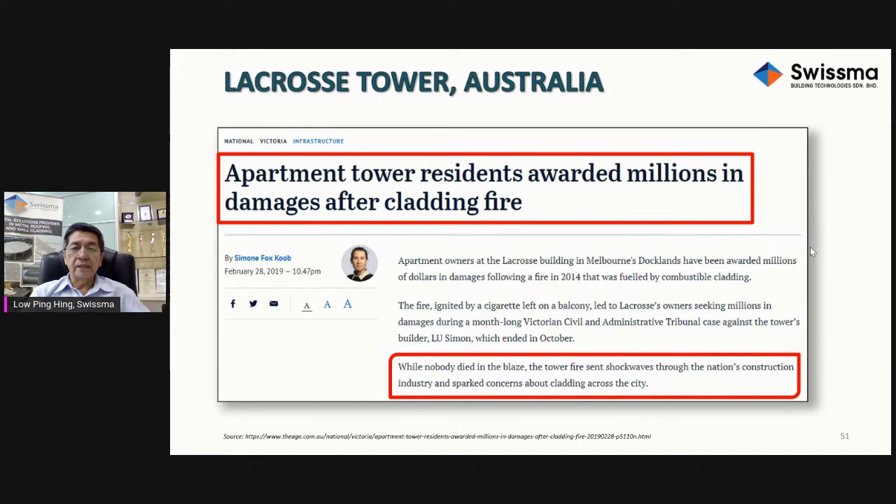While nobody died in the blaze, the tower fire sent shock waves through the nation's construction industry and sparked concerns about cladding across the city. I think it's not only sent shock waves throughout Australia, but throughout the world. So this is a precedent case that is already in place, and I think that will be a case that any Commonwealth country can call upon in their argument for any incidents of fire caused by facade cladding.

So a lot of people, just to let you know, the fire was started by a smoker, right? This smoker threw away an unextinguished cigarette butt into a rubbish bin that caught fire, and hence caused the facade to catch fire. So he causes the fire, the smoker. So logically, the guy who started the fire should be liable most, at 39%, correct? I mean, that's rational thinking.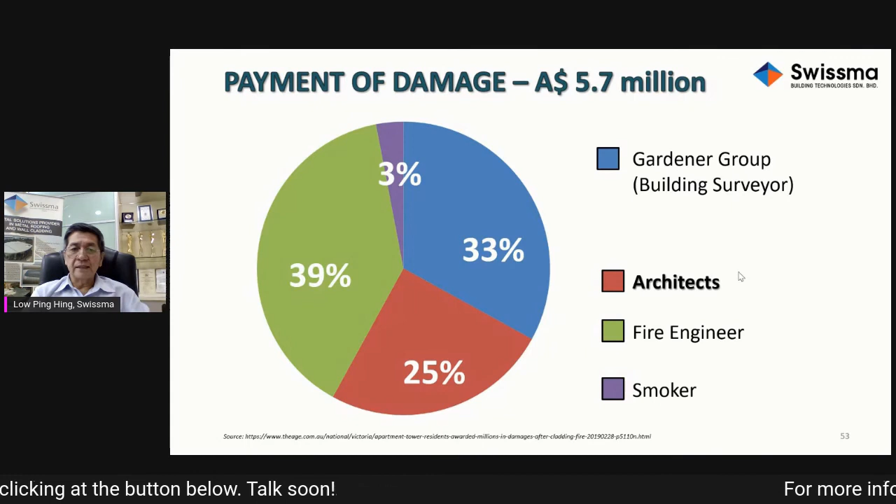The building surveyor at times also specifies the facade cladding. So what is the implication if something goes wrong? What will be the cost sharing percentage? I don't know. In Malaysia, there is usually an architect who specifies or selects the facade cladding materials. We don't have fire engineers here. I think at best for facade cladding, we have facade consultants. So whether the facade consultant takes over from the fire engineer, or the architect assumes the biggest part of the responsibility, I'm not sure. You've got to really figure this out. Whatever it is, the point is all these consultants are responsible if there is a fire to the facade cladding.

So, alternative external cladding systems using coated steel. My last part of sharing is to give you ideas about what kind of facade cladding you can also explore. In countries like Australia, and also America, they often use trapezoidal metal deck cladding, like this project, Emerald Hills Aquatic Center.

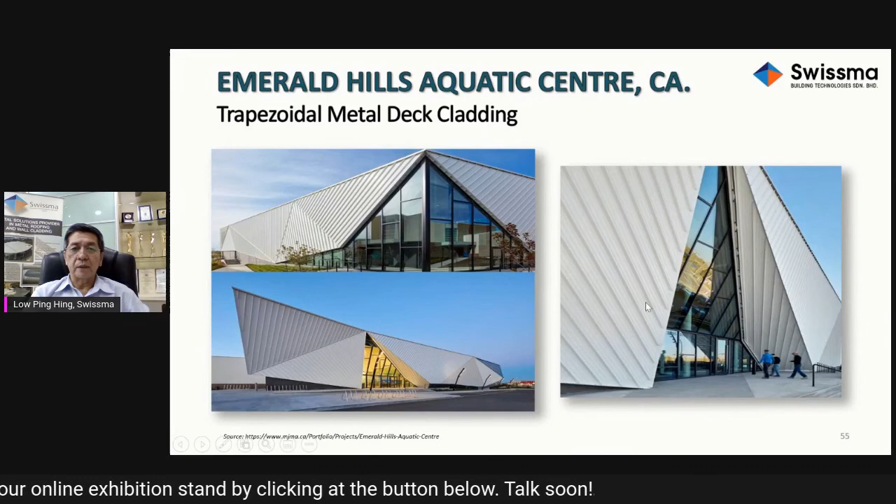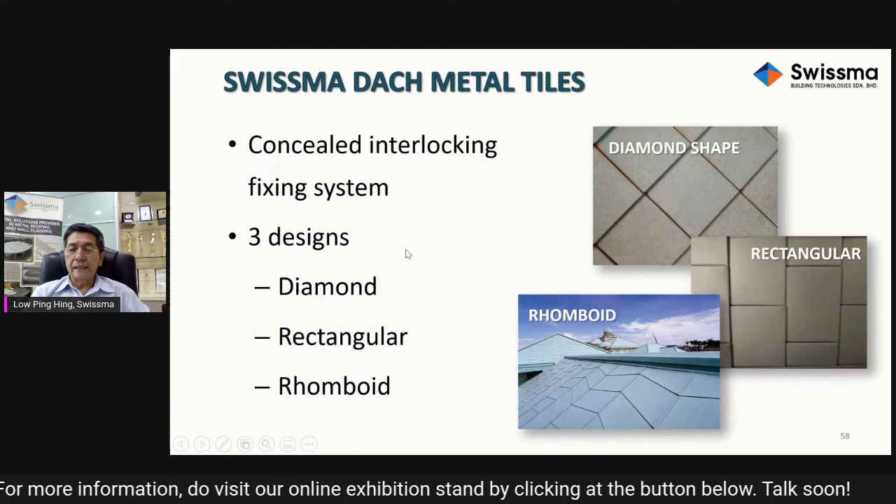We have a metal tiles system called Dach metal tiles. It's a concealed interlocking fixing system with three designs to choose from: diamond shape, rectangular, and rhomboid. If you have a masonry wall, you could construct the system using these metal tiles by incorporating a metal deck as the support layer to mount the tiles.

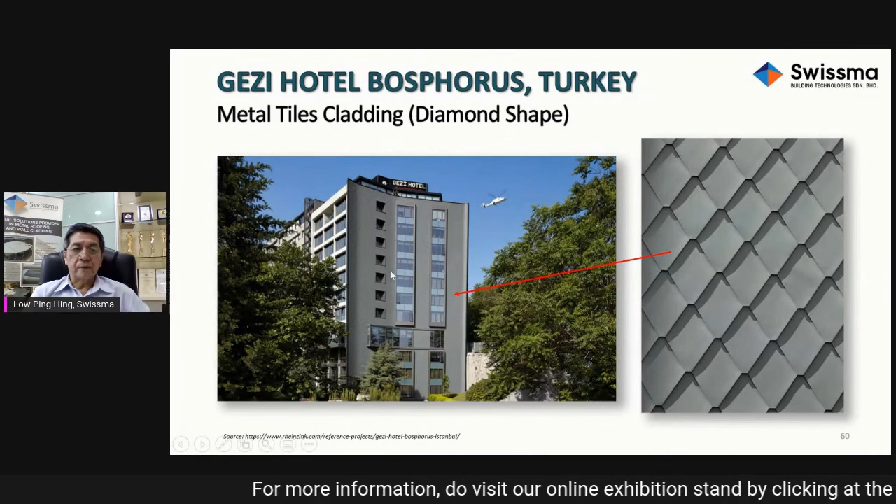This Gezi Hotel in Turkey incorporated this metal tiles system as facade cladding. So that is from far, and close up you can see it's very nice looking. Our office in Shah Alam is also using these metal tiles in colorbond steel, which actually enhanced the aesthetic of our office facade tremendously.

We also have this standing seam called Swissma Doppelwelt standing seam that can be used for roofing and wall cladding. This profile is very versatile - it can be tapered and curved, and there's a concealed sliding clip system that allows for thermal expansion, and it's completely leak proof. As you can see here, it's double folded.

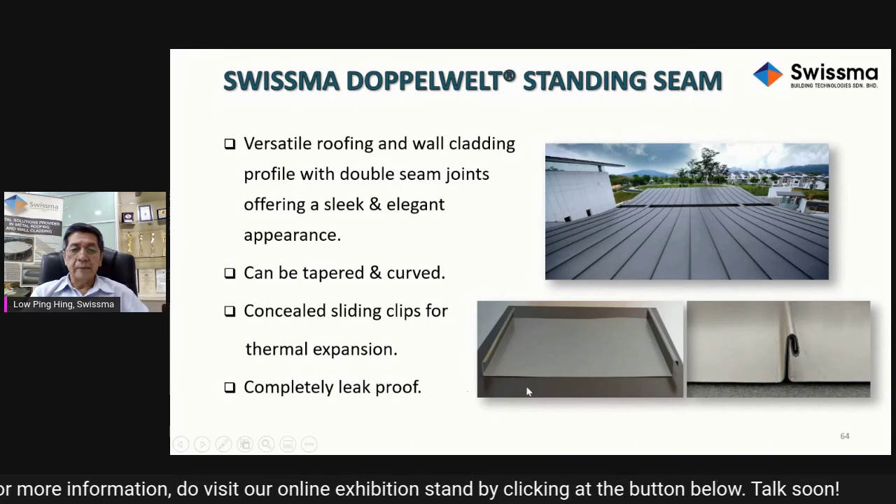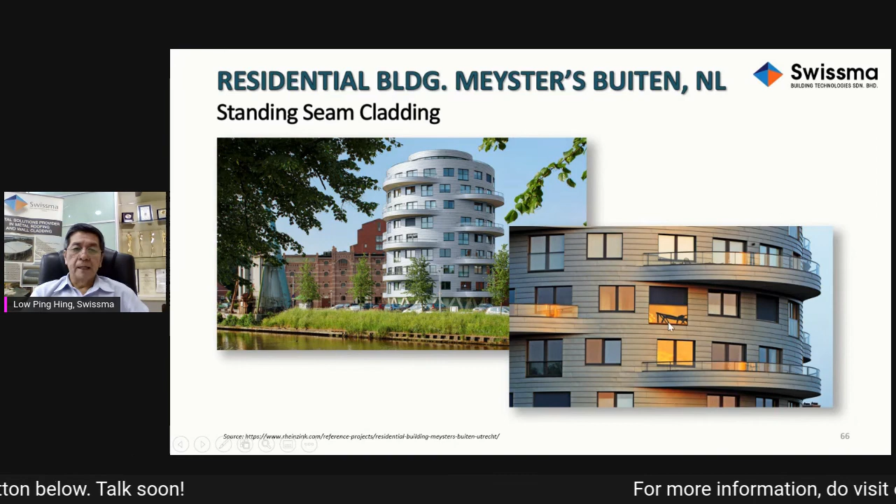So an example of standing seam cladding can be like this, right? The lines are joints of this circular building, because the standing seam panels can be pre-curved or tapered, so they can fit any geometry. In this case, it's a perfect system for cladding a circular building.

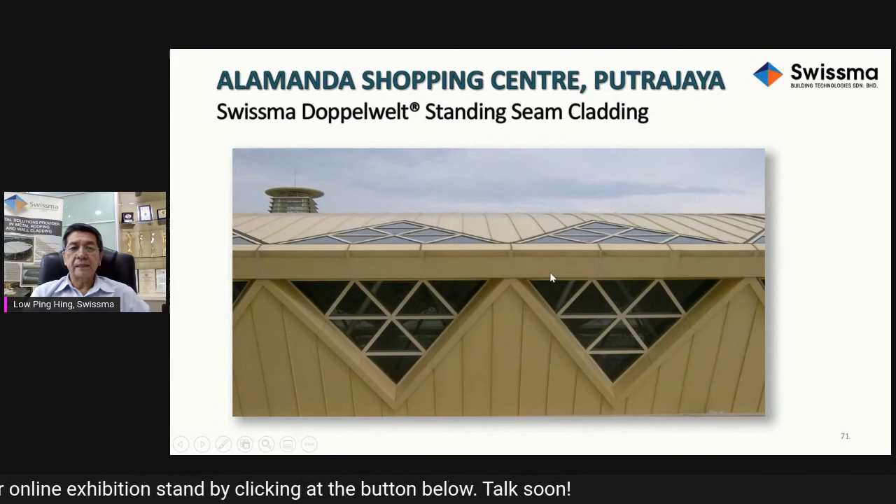Back home, the Alamanda Shopping Center uses the standing seam, Swissma Doppelwelt standing seam, for the roof as well as for the cladding.

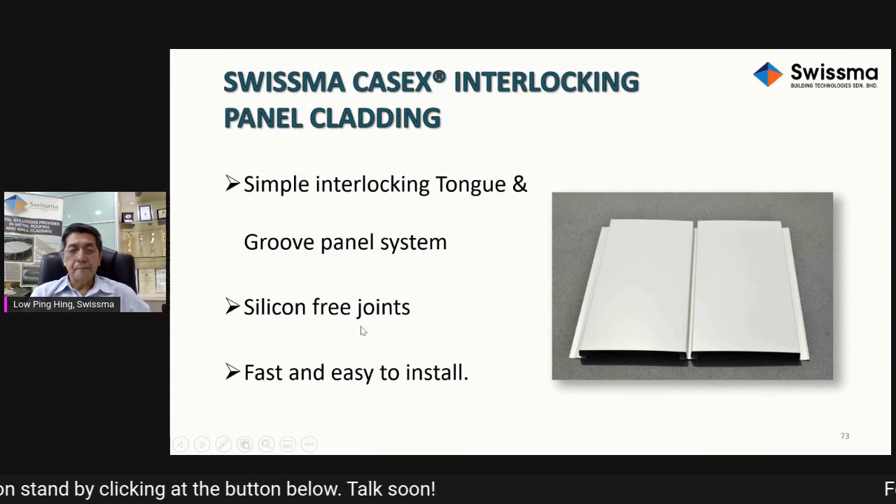We also have this Swissma Casex interlocking panel, which actually uses a tongue and groove joint, is silicone free, and is very fast and easy to install. An example of the system could be on a masonry wall with a subframe and direct fixing, very straightforward. It can appear like this.

This kind of design can be in the form of an interlocking panel like the cassettes, or it can be a standing seam, or a snap weld. Back home in D7 Kuala Lumpur, we have these Swissma Casex in Colorbond steel, laid horizontally, which offers a very differentiated kind of aesthetic to this building up close.

KDU College uses the cassette cladding but in a vertical format. It can also be used for industrial buildings—this factory uses the cassette system, with a condition imposed that there should be no lap, although it can be lapped, and this is 16-meter length.

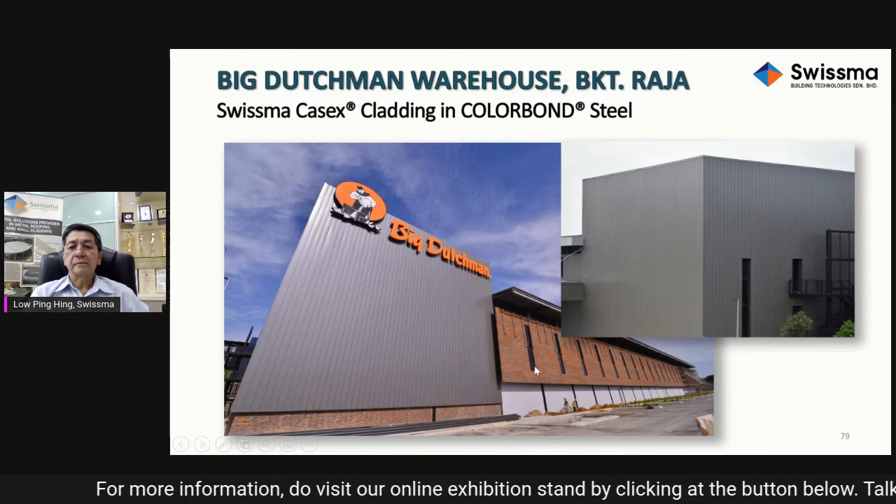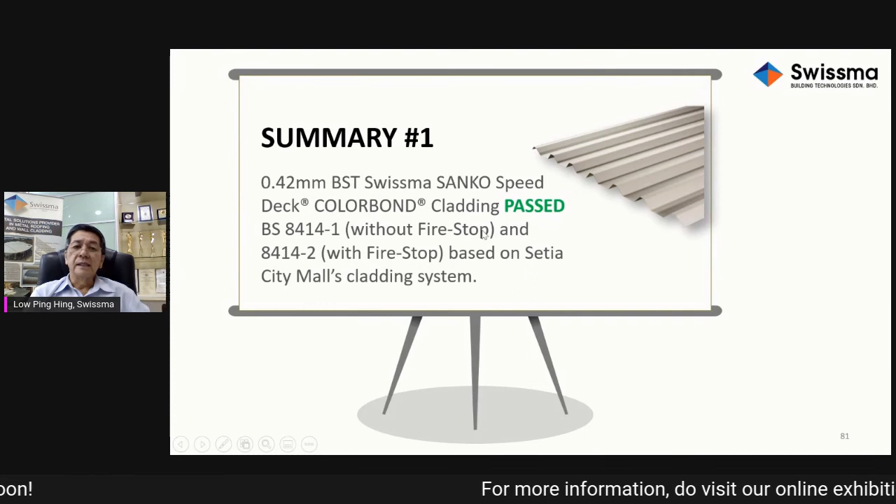So I'll come to the end of my presentation. First, I'd like to summarize the first topic: we did the test under BS 8414 for the Setia City Mall project. In that test, the 0.42 BST SANKO Speed Deck in Colorbond steel passed both BS 8414 Part 1 without fire stop—we did two Part 1 tests without fire stop and passed. The Part 2 test was tested first with fire stop incorporated as a security measure to ensure we would pass. But nevertheless, after seeing the results, there was confidence that we can do away with the fire stop.

For the second topic, the key message is: moving forward, regardless of whether the cladding material passes BS 476 Part 4, which is incombustible, or Part 6 and 7, collectively called Class O, the cladding has to be tested under BS 8414 because it is now a system test instead of a material test. So Class O classification can be insufficient to gauge whether the material is actually going to be safe to use as facade cladding.

In the BS 8414 test, I want to highlight that if you do a system, you have to inform or spell out what cavity depth, what insulation, if you add on insulation, and your choice of external cladding. If you vary the insulation thickness or density, Bomba might call for a retest, because even if everything else is the same, changing these two parameters might require another test. If your cavity changes, you need to do another test.

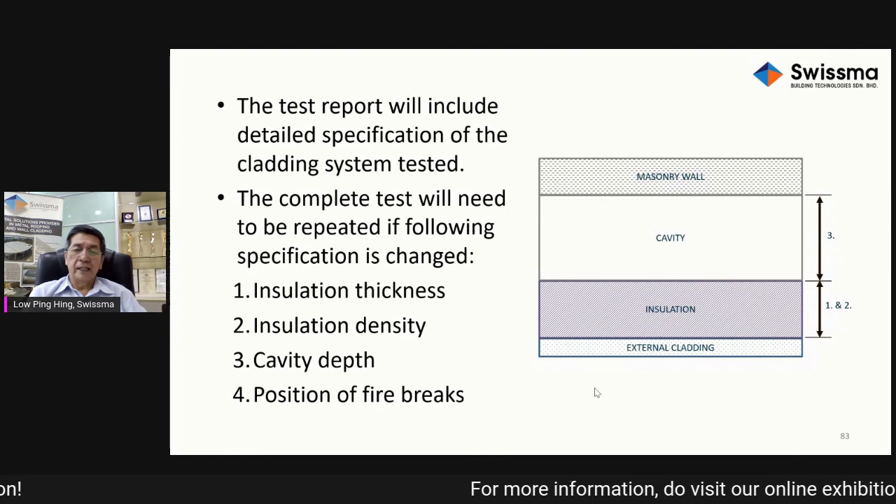And the position of fire breaks—if you've incorporated 5 horizontal fire breaks and take away 2, with everything else remaining the same, I think they will ask you to do another fire test. But logically, if you have 1 and add another, I'm not sure whether Bomba will ask for another test, since you're actually enhancing performance rather than the other way around. So all this, I think, will be subject to discussion with Bomba. If you've already done a test and some element changes, technically you're supposed to do a retest.

So the third topic is sharing, because this is already a precedent case—be mindful of the legal implications. Avoid unsuitable cladding systems that cannot meet BS 8414. Like I said, a precedent case has already been set in Victoria, Australia, where the tribunal ruled the architects, engineers, and relevant parties are made to compensate for losses arising from fire incidents. In other words, somebody has to be responsible, and they found that the people entrusted to design and construct the building, and ensure its safety, are the people responsible for the safety of the facade cladding.

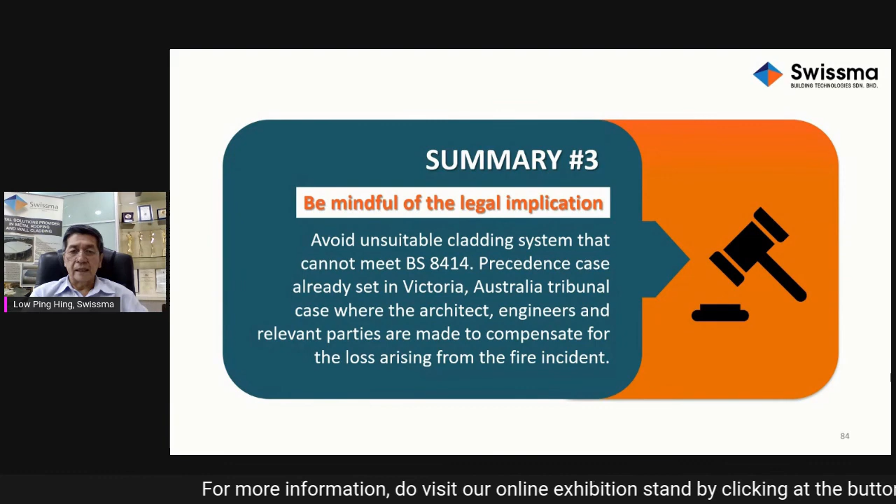Lastly, I've shared other options of facade cladding using coated steel, incorporating innovative and versatile systems such as Swissma SANKO Speed Deck, Swissma double weld standing seam, or the cassette interlocking panel with or without fire stop. So maybe it's time to explore alternative facade cladding systems and materials. With that, I end my presentation. Thank you.